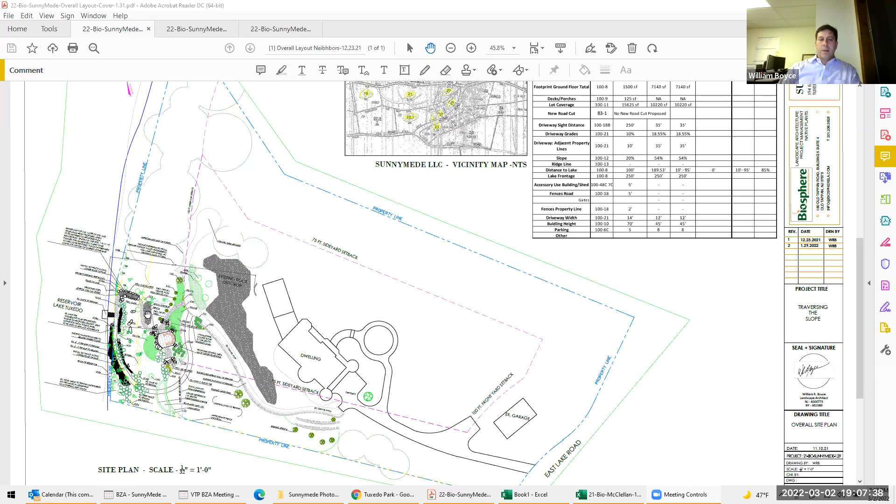I'm a landscape architect, working with the applicant. When I was first introduced to the project, the impetus was to create a place for the family to get down to the water and experience it in a way that was different from what was there. I was happy to accommodate that goal.

As you know, the site has been, recently purchased by a new owner. Prior to that, the site was denuded. I heard from neighbors and people in the community feeling as though it was strip mined. I heard that term, I heard denuded. All those pretty much apply.

Since the new owner has been there, they've worked to remedy some of those situations. However, there is still one big scar on the landscape, or maybe a few that need attending to, but one in particular is the gravel pathway that extends within the riparian buffer all the way down to their dock. That's where I'm pointing now.

The objective is to provide access to the homeowners in a way that's safer. It's a gravelly slope that doesn't feel comfortable walking on, while simultaneously restoring that riparian buffer, which is very important to the water quality within Lake Tuxedo.

There's a few strategies we'd like to use to accomplish that. One would be to remove all of that gravel and loose aggregate that's in that area and very erosive. Two would be to pull back and make the existing riprap in that area less linear so that it fits the visual mosaic of what is there, and then plant lots and lots of plants.

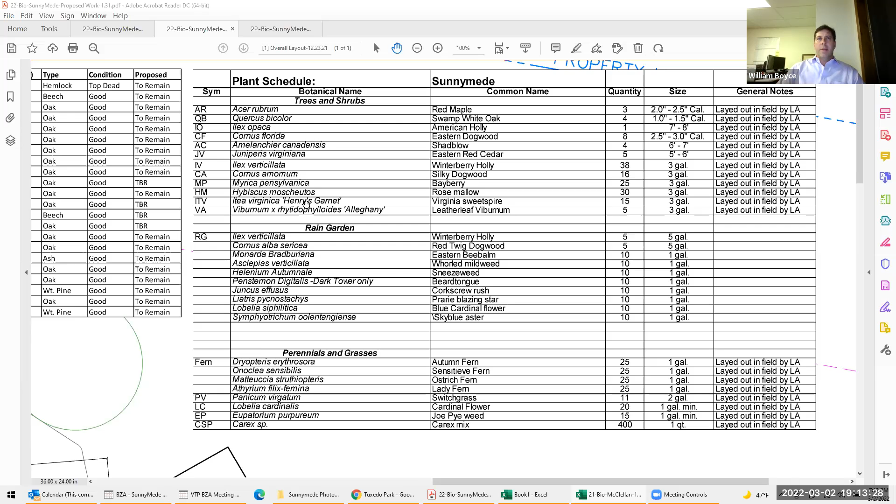And then throughout the riparian buffer, there are another 546 smaller ferns, switchgrass, cardinal flower, Joe Pye weed, and carex.

They're all native. They all will work beautifully within what's there now, woven into the existing plant material.

The moss that's there now, we would not be interrupting any of that, only adding to it in small pockets by hand, so as to increase the biodiversity within that buffer, which, as we all know, will filter the water.

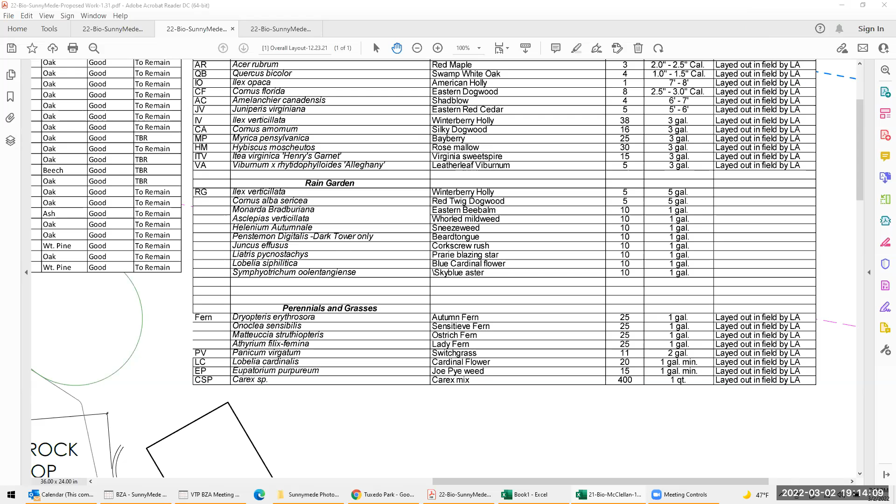It'll be kind of mixed in with the plants, not to smother any plants, but very carefully. Some can be pulled out also.

And take over all the native plants there because it's far more invasive than anything that's native.

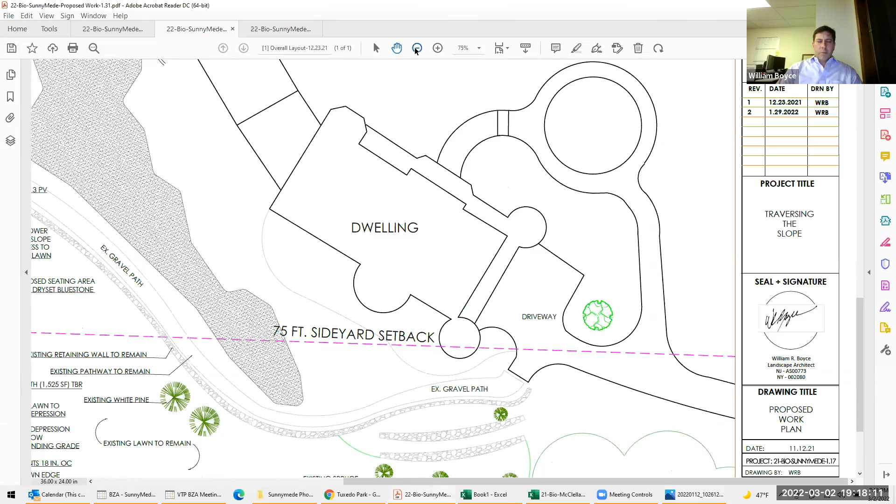Let's see, I'm going to zoom out a little bit so we can see more of the plan, and then I'll open it up to everybody.

Of course, we would be using erosion control measures to make sure that the water is protected during the course of the work, and even can retain those measures as long as necessary till we know that erosion is not going to happen. There's tree planting details and landscape restoration notes.

This is the actual plan itself. Oops, too big, I want to make it smaller.

There are far fewer trees being removed in our revised drawings than there had been in the previous submission. Now we're only looking to provide a small view out from this area of the lake so we can enjoy it.

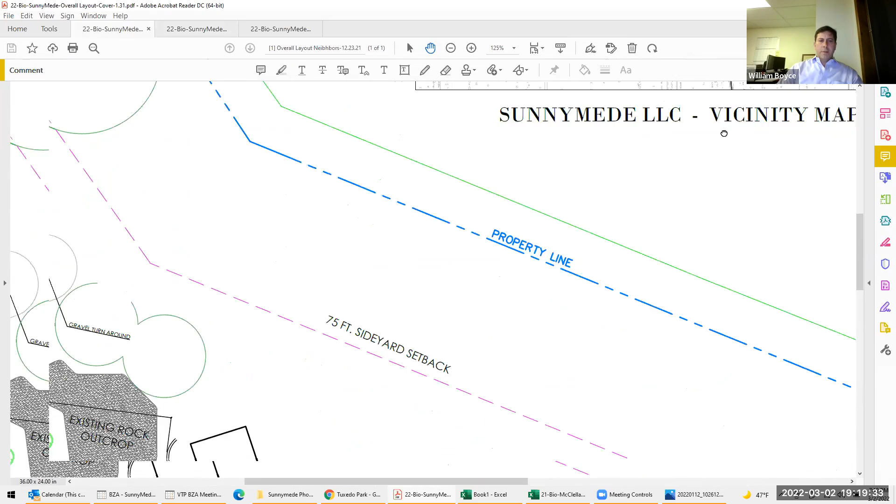Additionally, those trees that would be lost would be compensated for by 154 some odd native plants that would include oaks, because we do know how important oaks are. Your board pointed that out, and we're respectful of that. We want to definitely accommodate the needs of the board and nature. And I agree, oaks are amazing and very important. As a landscape architect, that's what I do.

That kind of concludes my initial presentation. I'm sure there will be questions, so I leave it to the board to further the conversation.

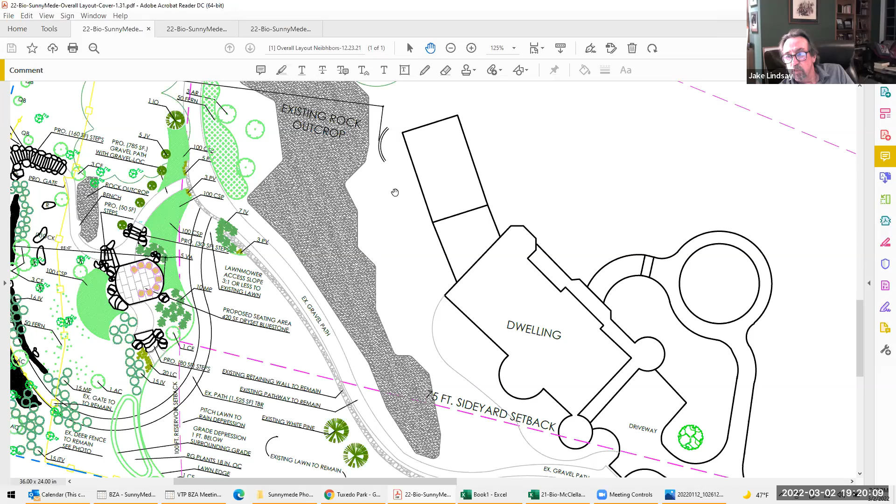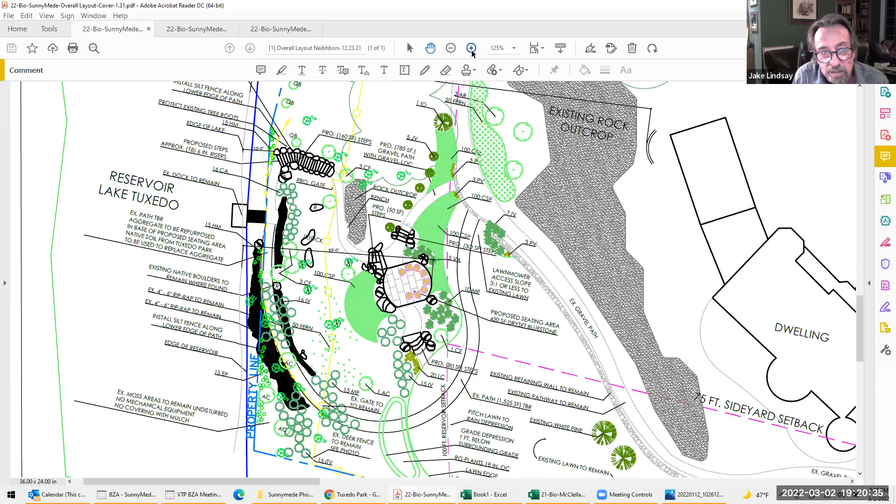William: You have the note here about the riprap to remain, which is actually very unsightly at this point, the riprap that's along the lakeside. Yeah, in testimony I just said that we would be mixing that up and kind of pulling it out. We're not opposed to pulling it out. I just don't want to do more damage to the plants that are kind of restoring themselves in and around that. I'm sure there's a pretty careful way where we can fix that, but I don't want to create an erosive condition on that steep slope.

We do have 546 perennials to plant in that area, so I'm sure that as we take out the pathway, we'd be pulling some of that riprap around, and I can re-note that. Right, because right now, quite frankly, when you look at it from the lake, it looks like a wall. Yeah, again, we don't want that. That's something that I want to fix.

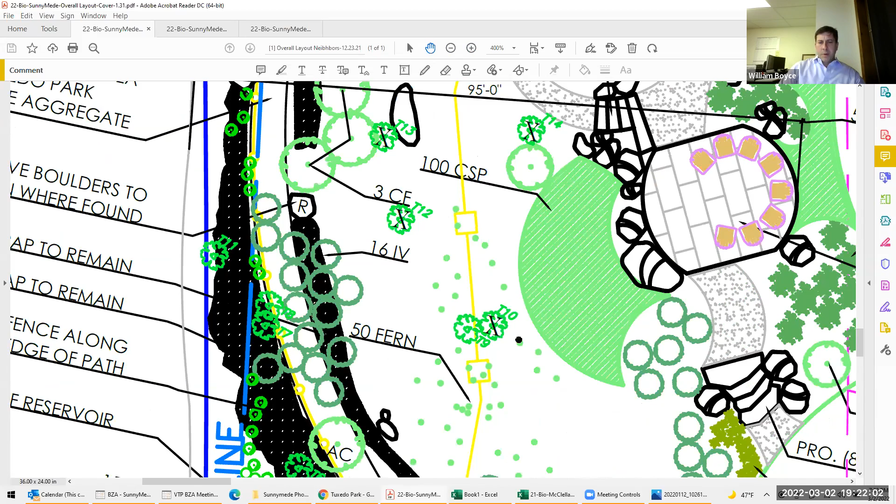I guess you should maybe just point out the trees that you are looking to remove and the size of them for everybody's benefit. I'll do that. The trees with the X's, such as this one, this one, this one, and then I'll refer to the list. Okay, there's 4, they're right here in the middle. 1, 2, 3, 4. Those are noted as T10, T12, T14, and where did the other one go? T13. So T10, 12, 13, and 14.

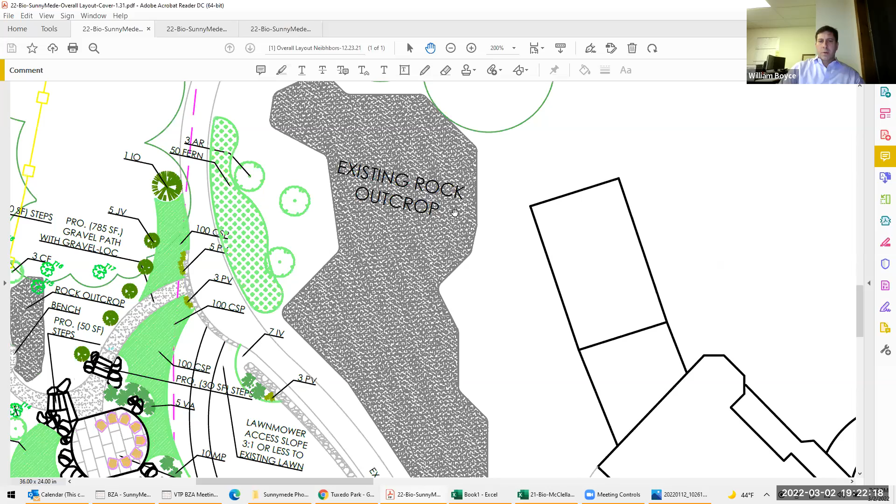And I can refer to the existing tree schedule to point those out. Can you also pull the photo that shows those trees? I will be happy to do that. I think my tree schedule is on my other plan.

T10 is a 14-inch oak. T12 is a 14-inch oak. T13 is a 13-inch beech. T14 is a 19-inch oak.

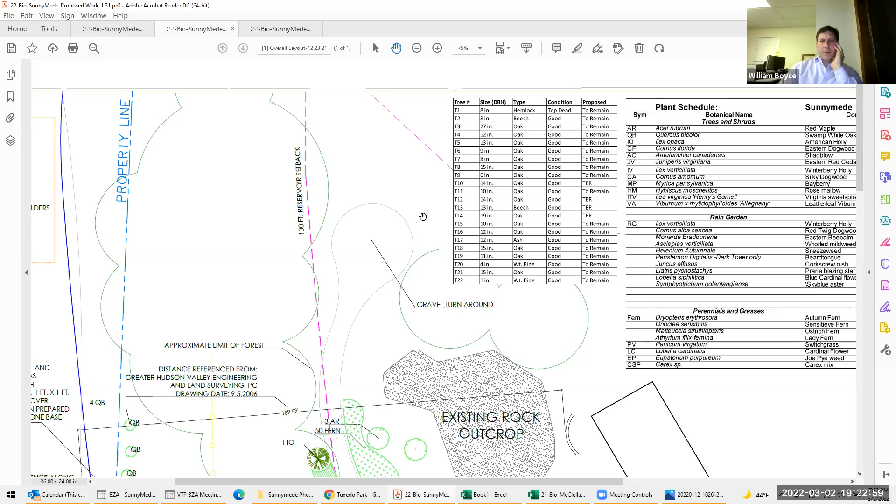Within that buffer, there are a total of 22 trees, 4 of which are removed, which I believe is within the ordinance's provision. But wanting to be good neighbors and good stewards, and also wanting a view, we were hoping to mitigate the loss of those trees by planting 150 other trees.

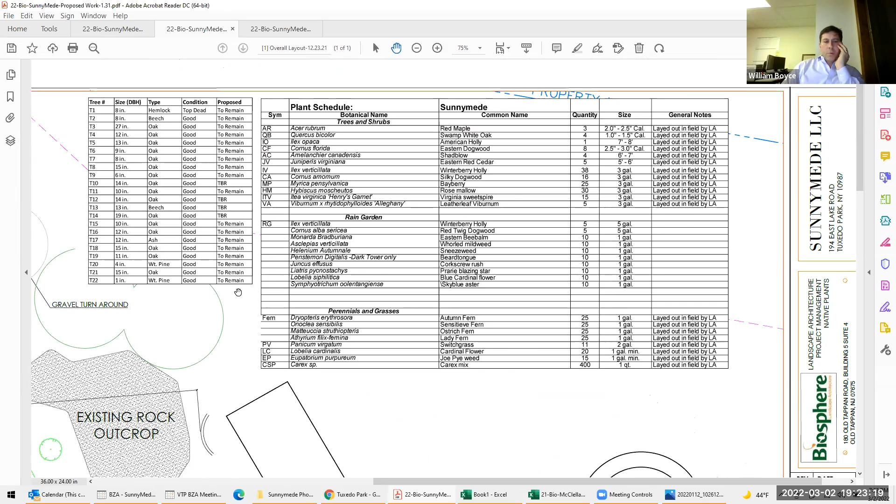So as to mitigate that and add more biodiversity, and create a lower shrub layer and an understory tree layer, and ultimately the larger climax forest layer, because right now there's few layers.

Okay, so now I can show you the photograph to illustrate that. I want to expand it. There we go, those trees are right in this area here. So remaining would be all the trees along here, and then all of these trees here. So it's really these 4 right here. And then again, there would be an understory shrub and tree layer complementing the balance of the site.

The other question I have is the existing path that comes down from the home, what you call your existing gravel path, and a lot of that falls outside of the 100-foot setback. I guess that's part of it that's in there right now, correct?

Yeah, this path falls entirely outside of the setback. In fact, if you can see where my cursor is, right around here, this is all disturbed land, which my plan doesn't really capture accurately. That's exactly what my question was going to be. Quite frankly, I think if we're looking to restore, that area would need to be addressed also.

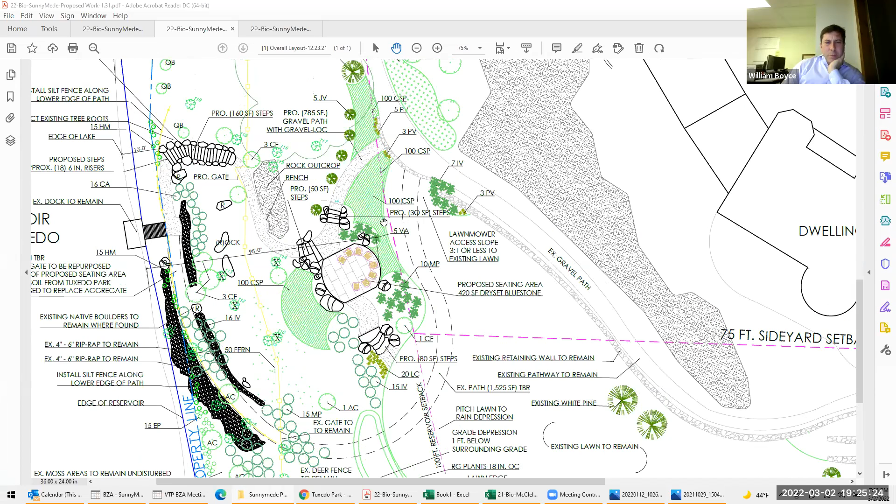So our intention with that area is to come down the gravel path, which we're looking to secure, and that's outside of the buffer. The buffer is this magenta line. Eliminate this cinder path that goes out of the buffer and then in the buffer, add a lawn within this space here.

And then that lawn would be non-erosive. And then these are carex pennsylvanica, and this is all native, low-growing plants. They're like small grasses that are semi-evergreen, they would be through there. And then Juniperus virginiana, which are native juniper, the tree form of a juniper, and they attract wildlife and are just great for the environment all around.

So yes, we would be restoring that area that's in the photograph, and then the area also that would be outside of the 100-foot, too, where you have the note lawnmower access slope, 3 to 1 or less.

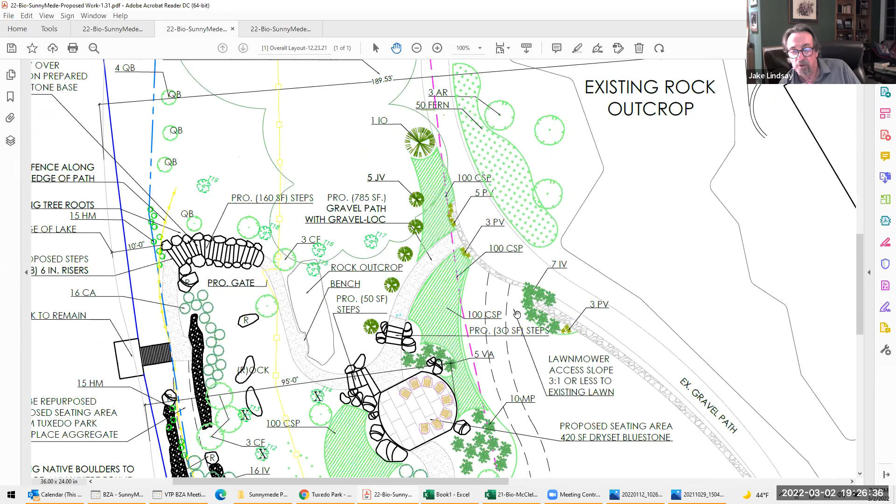That area where that note is, is also a very visually bad area. Yes, I think this picture kind of hints at that. We have our friend the Japanese knotweed here, so that needs to be removed.

This rock would stay, but really from this rock wrapping all the way around, all of that would be improved, planted. It would either be lawn or plants. I have plants along the edge. All of these plants are myrica bayberry. They're phenomenal, I love them.

These are Ilex verticillata, called winterberry, so they'll have red berries in the winter which the robins will be looking for. And this is just Panicum virgatum, a switchgrass right here on the end, and that'll all soften the terminus of this wall. And then between the wall and the carex, it'll all be grass.

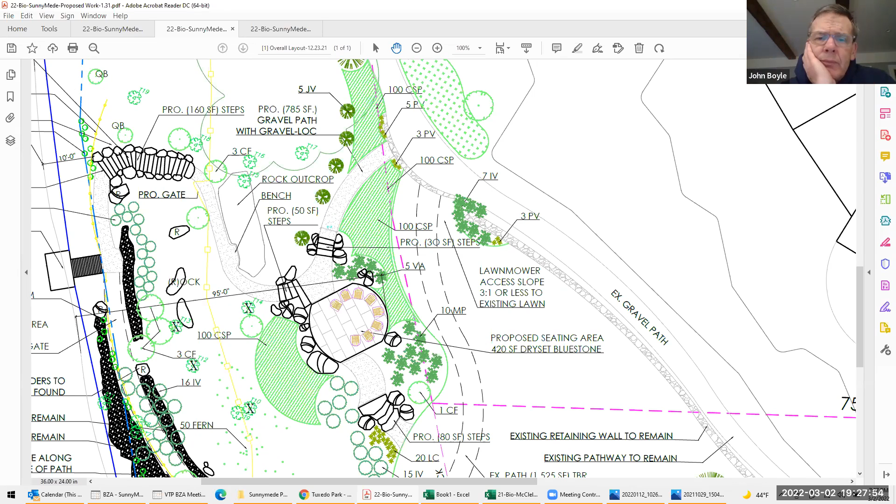I guess the question I have is where you currently have it says lawnmower access slope, is that all currently just a rock outcropping now, or is there an ability to add vegetation there as well? Yeah, there's just one big rock there, right here.

I'm thinking the area actually to the right of that, above the path, right in this area? Keep going to your right. This area in here, right? It's all kind of barren and looks like a strip mine. Yeah, actually, I have addressed that to some extent, I'll show you where I have 50 ferns going in there, kind of in and around.

Below that, you see where it says lawnmower access? Right here, keep going down. Yeah, that area in there, is that all rock, or is there an ability to add vegetation in there as well? Yes, sorry, I just had a visitor. Yes, whatever is not lawn would be plants, and yeah, that whole area is intended to be restored.

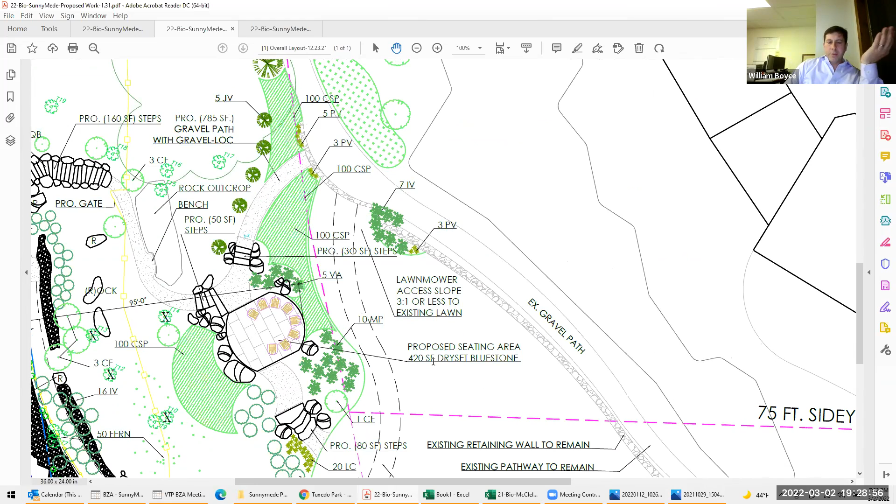Okay, well, that should be shown on the drawing then also. Yeah, that's not a problem, that's existing lawn to remain. I can just put a note: existing terrible lawn to be improved, or something of that nature.

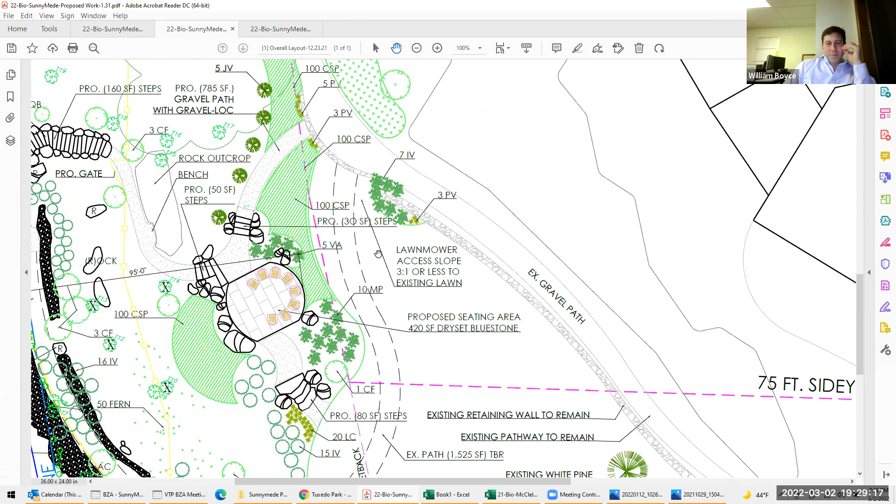Before we give it to the public, this should have had a topo to go along with it. Do you have the topo? Because you're pretty steep access here, and when you look at it, it's hard to tell whether some of the steps are going up or down, or what the grades are, or what percentage of slope in those particular areas.

I agree, I would have loved to have had the benefit of a topo on it. I've been performing work as a design build firm for 25 years, and in my experience oftentimes we don't have a topo. But all of these risers are 6 inches, and I can pull a string level from here and do it based on spot elevations. I really just want to weave it into the existing slope, and I know that's not going to be a problem for us.

I went and took spot elevations at the bottom of this riser and approximated the location of the top. I know horizontally I can make those 6-inch risers work to get up there. Then this is pretty flat all the way around. Then these are 4 more risers up, and this will all be flat. We use rocks that are on site. This is an existing flat area, pretty flat, and then there's a few more steps up here to get us up to here.

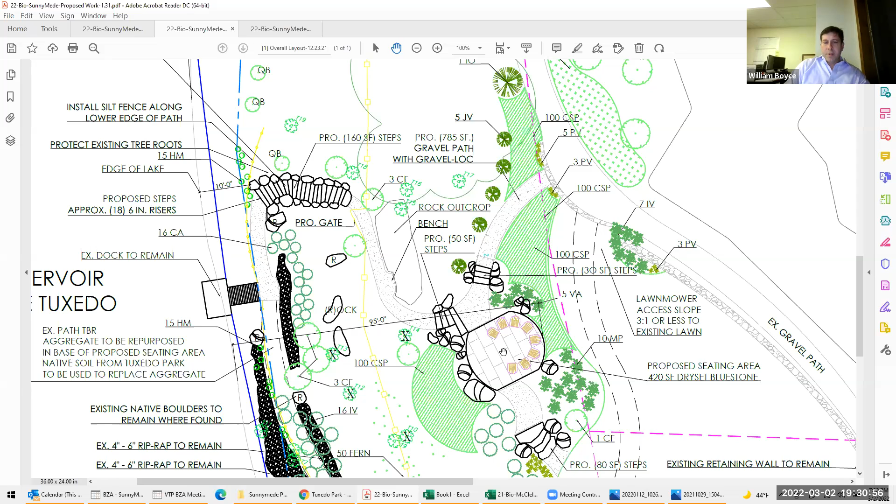I understand completely, we're kind of novices sometimes, so we really need to see where the slopes are. I understand.

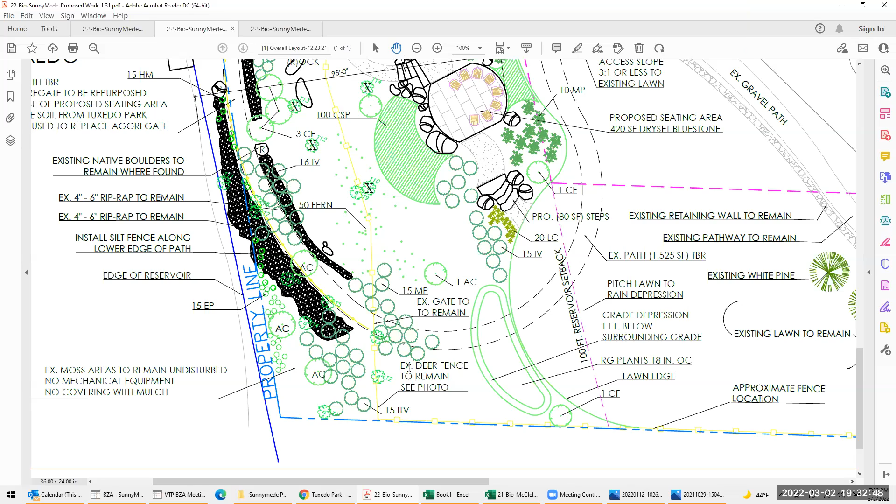That kind of gives you a sense of the elevation, I think. Can you blow it up, John? What section do you want to look at? Well, just have it be the whole screen. Even if you just get the whole screen, right now you've got the half. You've got your downloads on it. Is that what you see? Okay, yeah, I see half a picture and then the downloads.

Hold on a second, let me see if I can open it first. Bear with me. Nice sweatshirt, John. Well, we coordinate, we'll have to call each other again to get a different sweatshirt next time.

That better? Yeah, you got it. Much better, there you go.

So maybe, William, you can just kind of point out where the patio is going and where that barrier is. I wish I had that ability. How do we do this? Well, because John shared, John's going to have to do it, I guess. He's got control of it, right? William, you can see my cursor? I can, yeah, okay, all right.

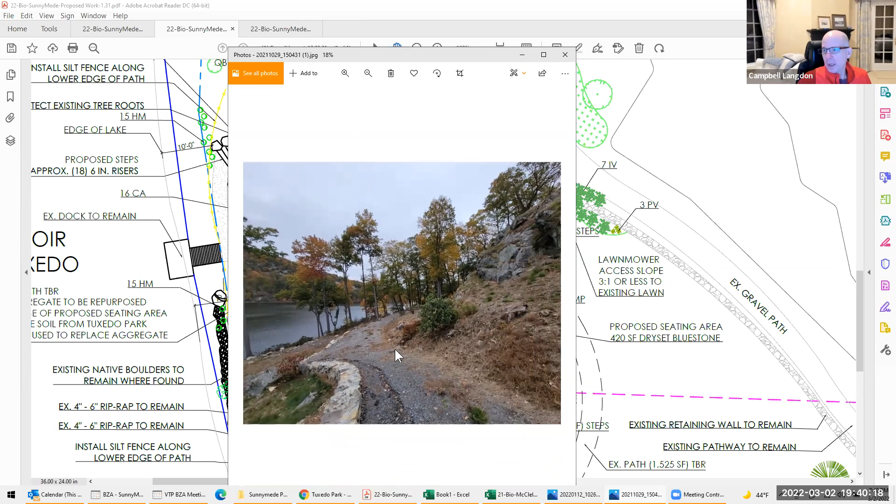Would the patio have to be graded to make it flat enough, or would you have to have a little grading in there for the patio? We'd have to do a little grading. We'd use a little bit of cut and fill, balance the cut and the fill. We're not importing anything, but we would cut into this area and push this way, and then use some of the rocks around this area. We're not proposing any fancy additional walls. It's really intended to be naturalistic.

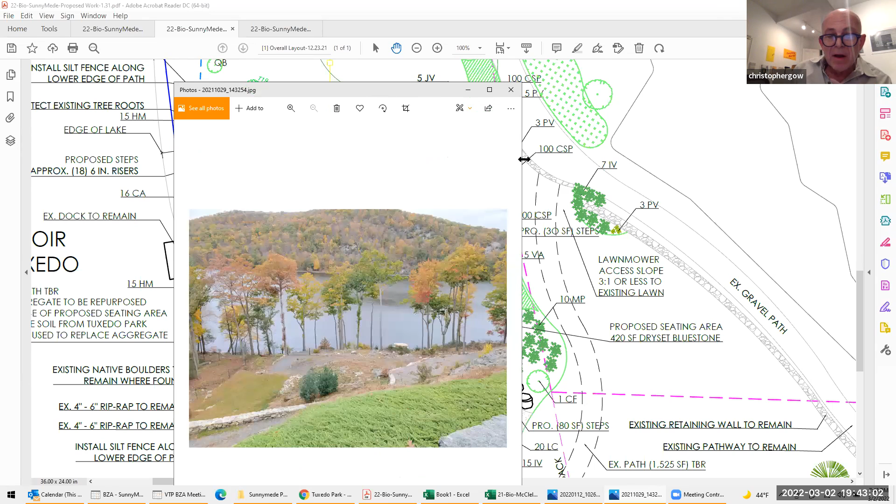From an aesthetic point of view, if we're not looking from the McLennan side, if we're sitting enjoying the patio, if we're looking at the McLennans from the lake - here's an analogy. It would be, I don't know, as if you're going to a ball and you've got your beautiful diamonds, your earrings and necklace and all your family jewels, and you forgot to put your tiara on, you've thrown the tiara out. That beautiful canopy of trees above you would be missing.

So there is this sort of platform, like the top of an Aztec ziggurat, where you'll be sitting completely exposed to all of us on the lake, yourself completely exposed to the sun, because you won't be sitting there when it's not sunny, and those trees will be providing you a lovely shade. Otherwise it's going to get very hot there. So I really, really would implore that you keep those trees, especially the 19-inch oak tree, the T14 tree, which is quite near the patio, and that would be the one that would provide you with some shade.

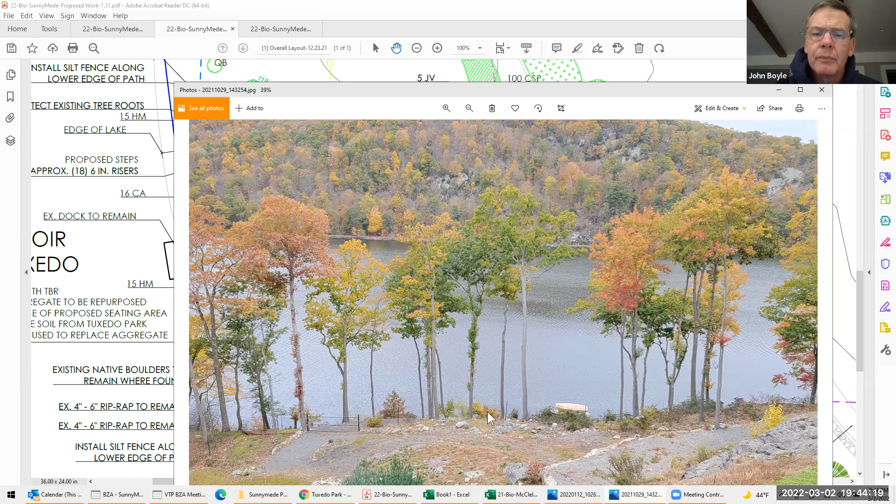Could you point out to me again which 4 trees we're talking about, William, please? On the plan view or this photo? Right, we're looking at right now. Yeah, these 4 here. Okay.

So if we analyze these 4 trees, and Christopher, thank you for that, I do appreciate it, and I do appreciate trees as well, as we all know. These 4 in particular, this one's displaying suckering branching, as Mr. Gow indicated, they have been stripped of their lower branches.

Of course, the loss of any tree is not necessarily the greatest thing, but I know the applicant has made it clear that they really, really like the water, and they are restoring the whole ground plane with copious other plants, all native, really looking to create more of a layered effect and feel as though that would be compensation. I think that the shade they would be benefiting from those trees might hit at a certain time of day, but I think most of the day, given the elevated canopy, it's not going to be as wonderful as we would love.

I know that the last time we presented, there were 10 or 11 trees to be removed, but after really analyzing what the owner wants, they really want an uninterrupted view of the lake from that one spot. So we worked with them to refine the expectation, and it's hard to keep those trees in that spot because they want to see more water in a contiguous view. That's the position I'm in.

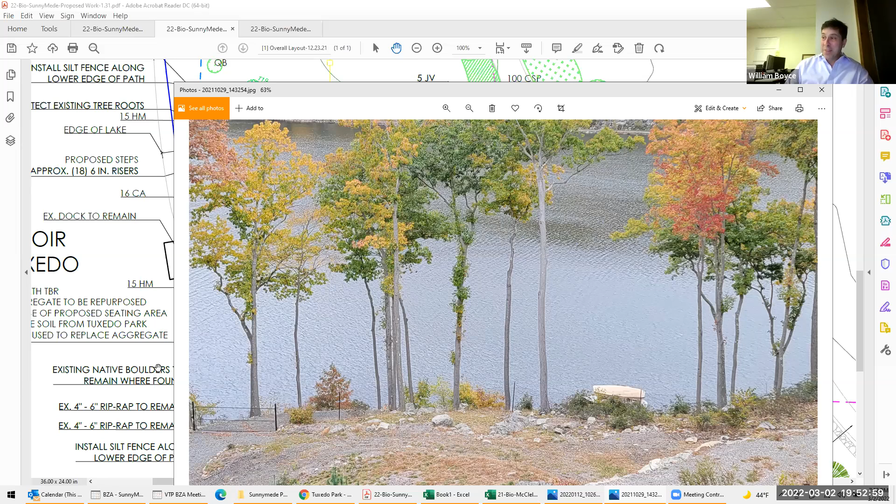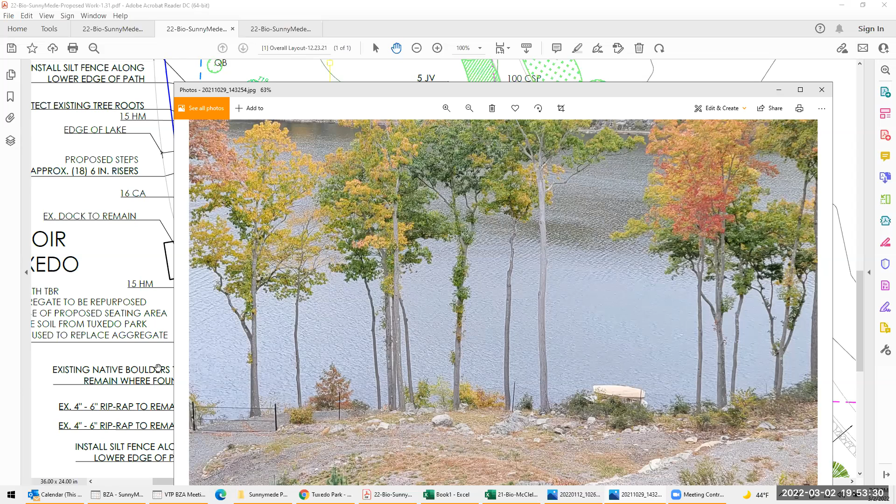John, you've mentioned previous meetings about doing something at grade. Doesn't need the same type of variance, is that correct? Yes, this is construction activity in my interpretation, within 100 feet of the reservoir. There's also terrain alteration, and it would require a variance within 100 feet of the lake. I do understand the code may be vague in certain points, but I think the code's main prerogative really is to protect the environment and protect the neighbors from activity.

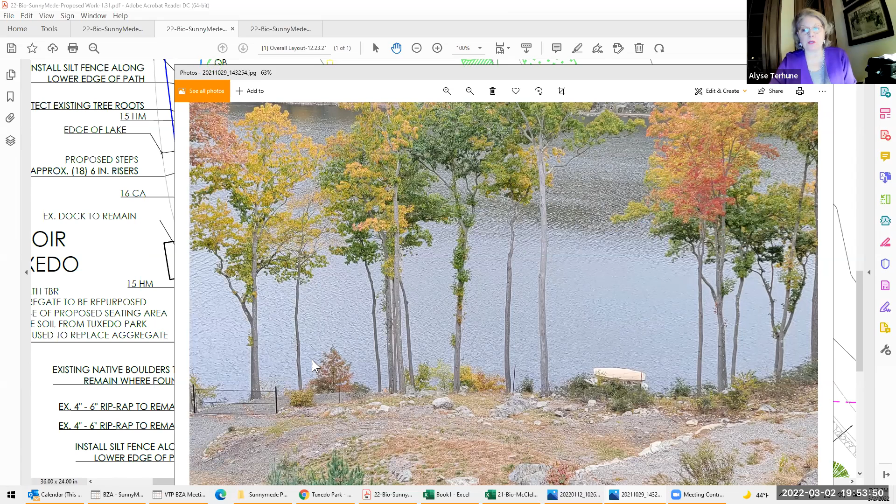Mr. Chairman, may I ask a question? How far from the lake is the patio? What's the closest point of the patio? Well, they don't show that, but obviously the steps would be the closest construction, and that's showing at 10 feet. I would suggest they add a measurement from where they want to put the patio as well. Right, they show 10 feet for the start of the steps and the stones around the steps, and they probably should show what the patio is also.

Yeah, that's a fairly flat area. It's not natural, so I would think the zoning board would want to consider where it actually is. Well, that's one of the reasons I think we really do need a topo before we finalize things. If you look at the existing property right now, it's just a flat area that has nothing on it. It's eroding, it looks like garbage. And all they're doing is putting stone on top of it. You may consider that construction, but it's just papering over an existing flat area. In fact, it'll be less erosive having this patio than it would where it exists now.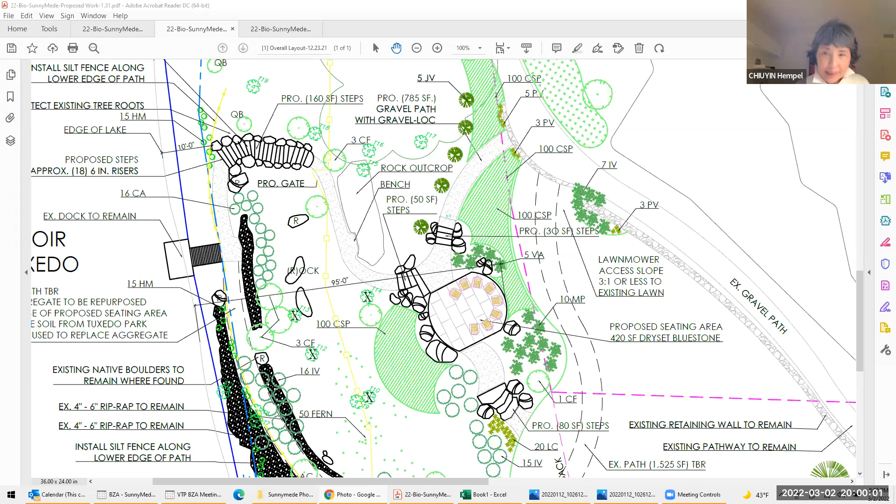So think about the precedent you are setting, the example you are setting, by allowing construction within 100 feet of the reservoir. To this last point, I'd like to make a distinction between landscaping and construction. I'm delighted that Mr. Boyce and the owner are thinking of planting all those wonderful trees and shrubs, and taking remedial measures about that badly constructed path.

But the patio is an artificial construct. That to me is construction. In the absence of definitive statements in Tuxedo Park's law about building within 100 feet of a reservoir, I would hope that the BZA can actually look very closely at that particular part of the proposal, the patio, because that is construction, that is a structure, that creates more impermeable surface.

Even though I think in the BAR presentation Mr. Boyce said he's going to make it as pervious as possible, and there will be a rain garden and so on, I'd like to suggest thinking of the precedent. Mr. Boyce and Sunnymede's owner are environmentally sensitive, but we can't guarantee that everyone else following will be. That's all I have to say. Thank you.

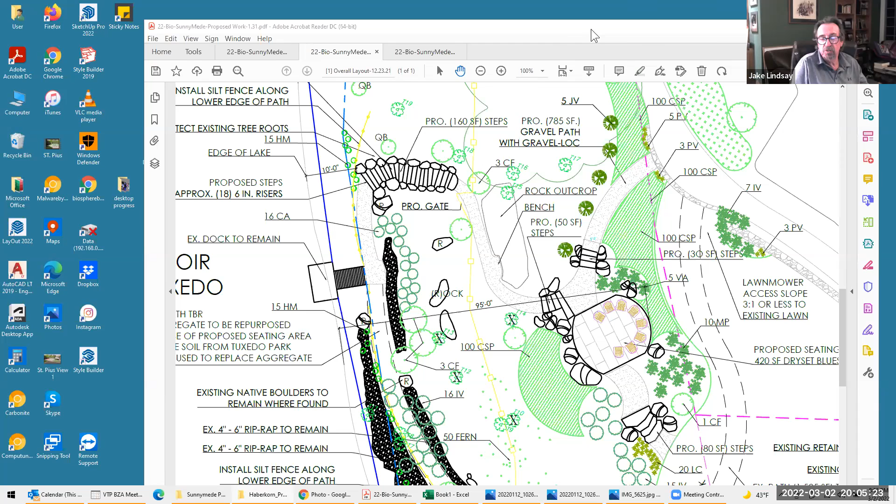There's one neighbor that did it allegedly illegally. The one you just showed is 224 East Lake Road, which was approved within the last 2 years. The Bruners were also approved recently, but that was a lot smaller of a project. You can't even compare the two.

It's a lot larger of a project with way more stairs, a much larger patio, and the same thing for the Haberkorns. The Haberkorns' project was an existing stair that they actually cut back.

So it feels a little bit punitive, where we've tried to do our best. We agreed to take out the 4 trees we're already allowed to take out. We don't need permission for that, we can take those out. We're trying to be as environmentally sensitive as possible and make the area way more beautiful than it was, because apparently everybody hates it.

I would certainly agree with you, we want something done there. No question about it. But I'm not going to pay thousands and thousands of dollars to landscape a dust bowl for everybody else's pleasure if I cannot easily access my dock and enjoy it.

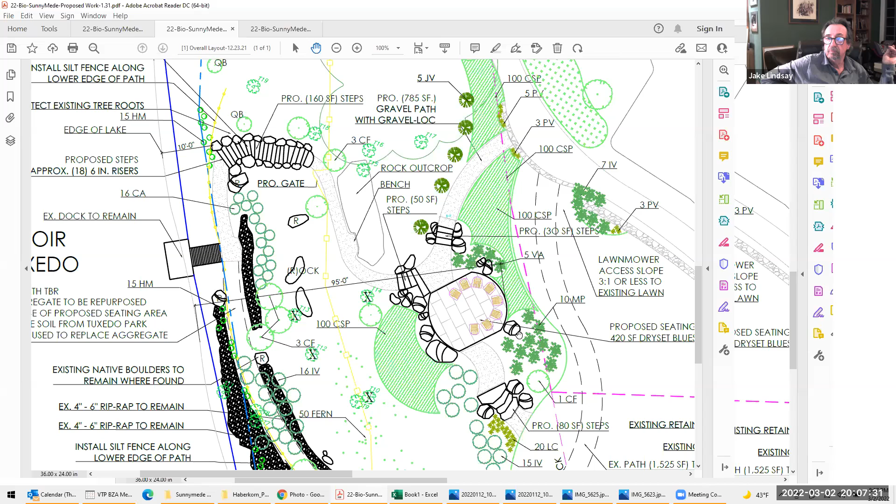Are there any other public comments at this point? I assume not. Elise, are you still here, Elise? Okay, you weren't coming up on the screen.

Yeah, I'm here. Mr. Chairman, if you are going to ask for additional materials from the applicant, you may wish to keep the public hearing open. Do you want to speak? I'd like to make a comment.

I appreciate all the environmental concerns, but I do have to agree with the applicant that this is a major improvement to the area. I don't feel that a 420 square foot patio, constructed the way it is, is going to alter the ecology of the lake or be an impactful structure. I think this plan is much better than the previous one, and they put a lot of effort into it.

Yeah, I would also agree with that. Even with the patio, it's likely to be more environmentally sound than the existing condition today. So it's not just an improvement from a visual perspective, it's an environmental improvement as submitted versus the existing condition.

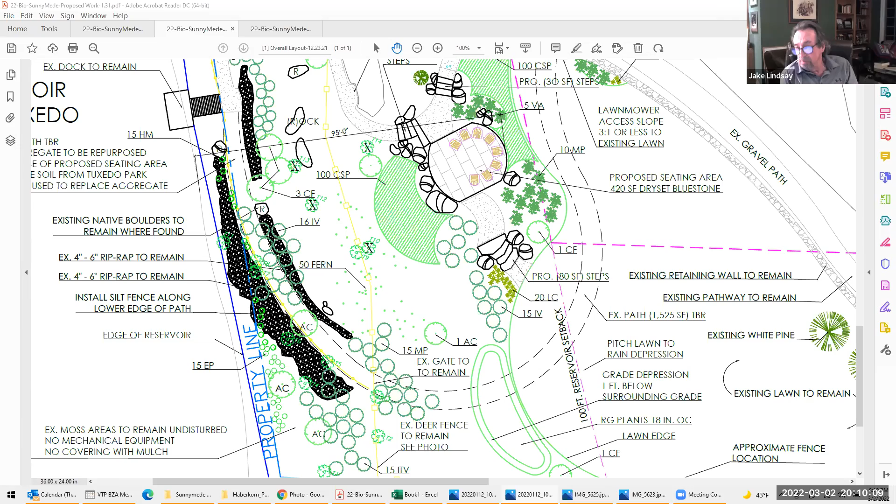So since they are asking for approval, we're taking into context the entirety of the plan. Elise, I would assume that in this particular instance we would look at the whole project, correct? Yes, you are deciding whether or not to allow construction of any kind within the 100-foot buffer, so yes, you're looking at the whole project.

I think their patio is just covering an existing flat area. I appreciate the concern around trees and everything else, but I think they are doing a lot to mitigate those concerns with existing or new plantings. I believe this covers a lot of the questions I had, not only on the setback but also the overall beauty of the project and its positive impact on what is a strip mine looking thing right now.

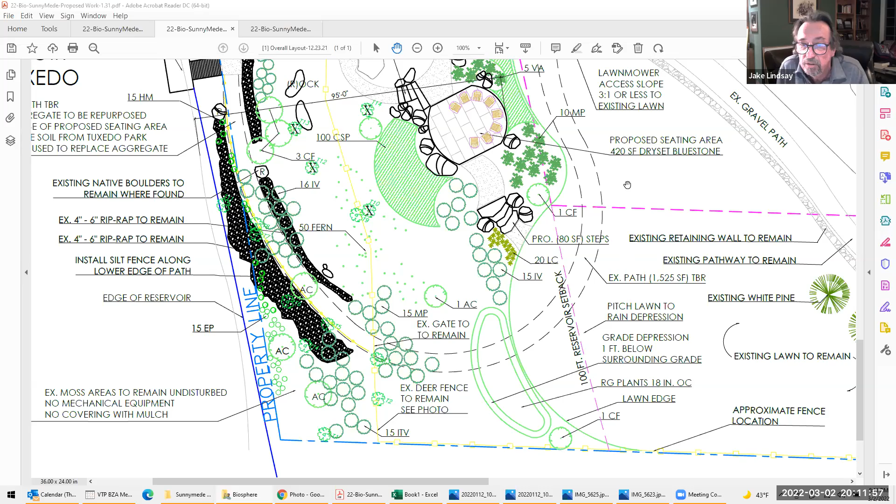I certainly agree that it's an improvement and it's moving in the right direction. I, number one, really think that a topo is really required for us to approve something like this. And I would also like to see more ground cover plantings in some of the areas that we pointed out, where you talk about existing lawn.

Up where the path is, and then to the right of that, where right now is the start of your path, off of your existing gravel path — no, the one that you're removing — there should be similar plantings in that area up to that wall.

Where the existing gravel path is, I would like to see a topo, and I would like you to consider saving some of those trees, because you're going to need a big piece of equipment to go down and cut that tree down. And then also you're going to need to take out the roots, I assume, unless you're going to stump grind it.

Actually, if we did take out the trees, I would leave the roots because they'll hold the slope together. So you would stump grind it then? Yeah, it wouldn't be an eyesore from the reservoir at all. At most it would be stump ground, or we'd dig around it and flush cut, sacrifice a few chainsaw blades. Well, stump grinding would be easier, and that's actually less disruptive.

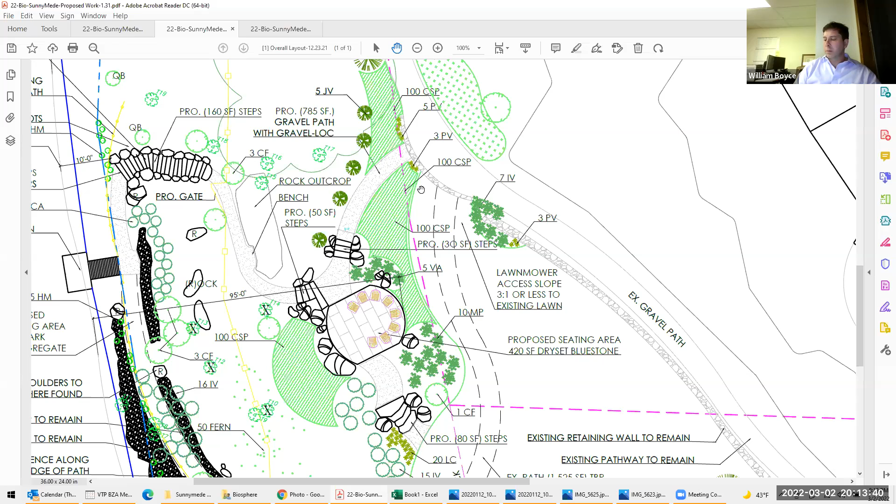Okay. Yeah, I would prefer to leave the roots in place and stump grind, as you're suggesting. I may just make a comment — with this project, the least disturbance possible. It's already a compromised site, so the least disturbance possible. Removing roots and that sort of thing is just a terrible thing.

There is another option as well. A dead tree is called a snag, and some dead trees are more useful than live trees as far as wildlife is concerned. So for the McLennans to enjoy this garden, the more trees there are, the more birds there will be, and the more songbirds there'll be. That'll be wonderful to hear as well, as far as the acoustics and aesthetics are concerned.

The other point I wanted to make was, yes, to make an exception for building within this 100 feet, something significant has to give in order to make this an exception. Yes, a small patio isn't going to make much difference — it's the principle that's being made here, that we're changing the rule for something. So I appreciate the McLennans and Mr. Boyce putting together this environmentally sound plan.

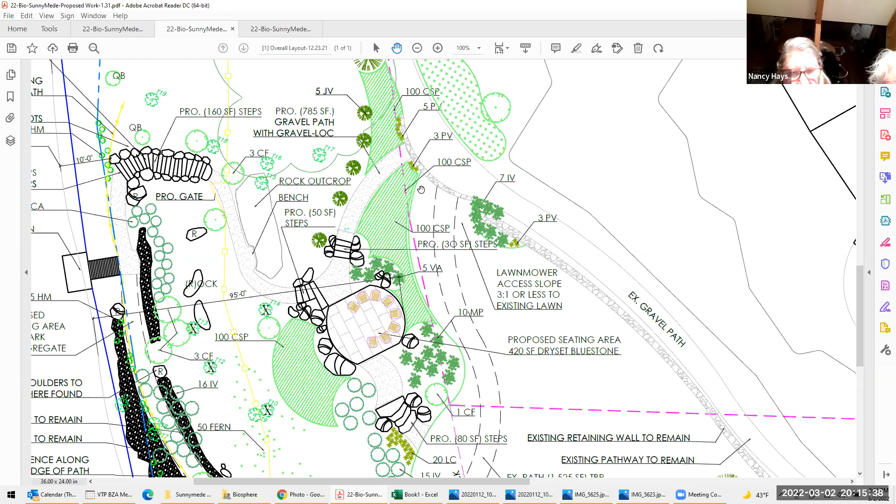Because that is the most fundamental thing — the aesthetics is important, but the environmental aspect is the huge deal here, because we don't want a chain link fence put around our reservoir, because too many projects like this have happened by the lakeside, and the DEC sees that we're compromising our drinking water. So it's great that the McLennans are making environmental leaps in the right direction, so there has to be a net gain, and a good example to make up for all the other neighbors that got away with it in the past and made our lake look like Greenwood Lake instead of Tuxedo Park.

With the boulders and the steps, this is going to look more aesthetically like an Adirondack Lake as opposed to Greenwood Lake, and I think we all agree that's why we're here. So the least suburban it looks, the least messed around with, the better. That's all I wanted to say. Thank you.

I personally would like to see more information and more on the drawings before I'd be in a position to vote on it. I think a topo would be required — additional. There's an old topography report that was done on the property, which is what we used when we submitted for the pool. Okay, but we don't have that in front of us.

Well, when we submitted — it should be, it wasn't requested. It just seems like a lot of stuff comes up. But I'm requesting it, for us to really review this, and I think the topo should be required — like every other one I've heard about a month ago when we turned this in. I'm going to look for the topo, and he's going to pull it up. And I don't know how these steps would be worse than somebody putting in a brand new boathouse on the lake.

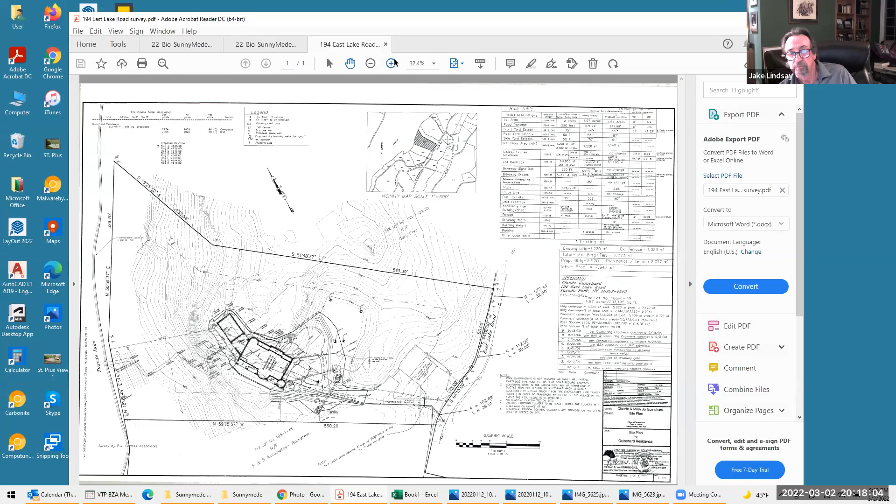Well, a boathouse on the lake, you're bringing in things that the boathouse carried over from an old code. People who had a boathouse on their property at a certain point in time are allowed to build a boathouse. It's part of the old code. Thank you, Bill, for pulling this up. As of 2008, right?

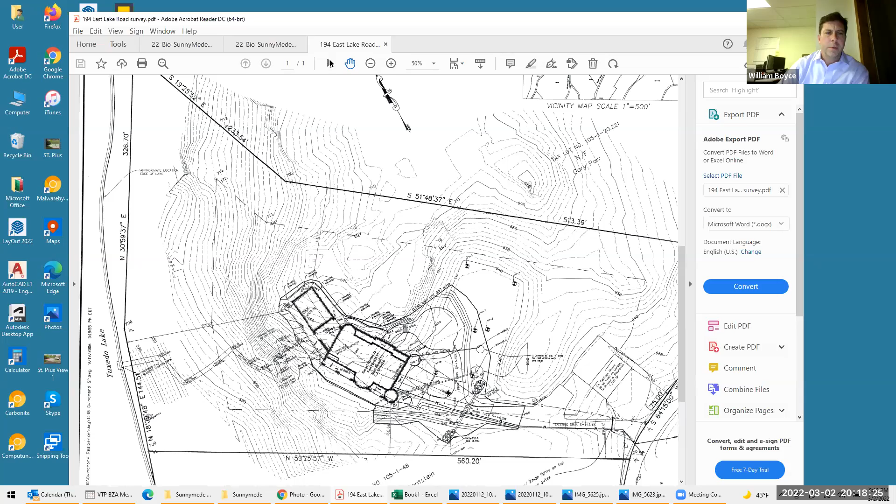Did somebody see that? This was revised in 2006, I see, but the water elevation probably is the same. Rock outcrops are the same. This is the extent of the topo that we have.

Just trying to pan down to... I don't think my computer's happy with me. Okay, that's better. Cliff, that's a cliff. It's steep, the whole thing is steep. So wherever the contours are close together, it's very steep, as somebody pointed out. So this is really steep. This is where the cliff is up by the house.

Since the inception of this plan, there was a road that was put through here, and I would say the dock is static, that hasn't moved. Has the dock moved? Anyone? No, it has not. Right.

No, but honestly, typically you get the landscape plan should have the topo on that plan, which shows the location of the patio, shows the location of the stairs, shows where they're coming out. This is somewhat, honestly, most of the time we're getting drawings, especially something that needs to be looked at closely. You should have a topo.

Understood. I mean, Bill, you're aware of that. I'm sure you're aware of that. Stairs, yeah, I wasn't furnished that information within the area that we were working, so thinking that we would be maintaining the existing topography the way it is, with the exception of exactly where we're putting the steps and the patio, which is on the flat area.

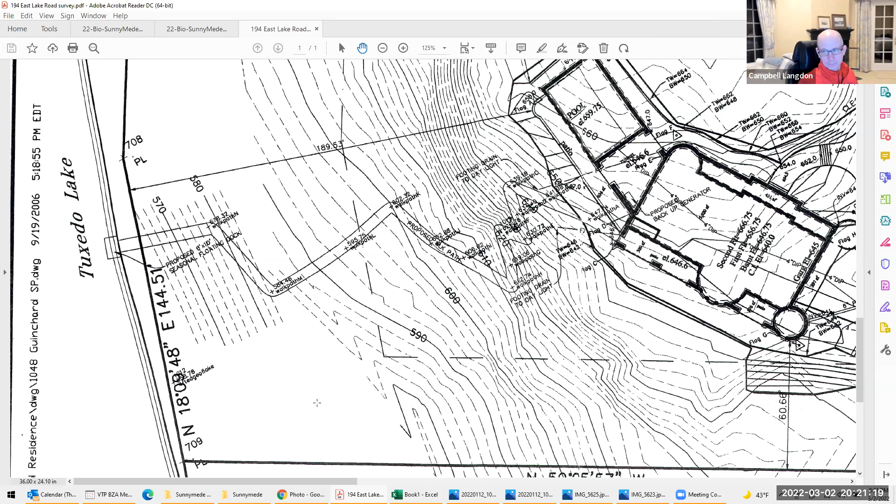So in my view, I don't see it as needed. I could do a center line by myself, just indicating the bottom of the riser and the top of the riser. I could do spot elevations all the way through the pathway and reference adjacent trees, which obviously are staying and would be static, except for the four that are in question. And that way, you could be assured that the proposed steps are respectful of the base of the existing trees to remain.

That would not be a heavy lift, and I could assure that in a note on the plan, where they're planting, and what they're planting. So you could give kind of spot elevations. Yeah, I could give top of riser, bottom of riser at the bottom of the big steps, top of riser at the top of the big steps, and then just do stationing along the pathway to help the board feel more comfortable. It's not a heavy lift and it's not time consuming.

I could, if the board were to, and I'm not suggesting this necessarily, grant approval for this conceptually, with the condition that I provide the spot elevations. No, the board cannot do that. I apologize for making an assumption. That's okay, it was worth a shot anyhow, right? All right, thank you. The board can only approve what is exactly in front of it.

So, Jake, does it make sense to have the discussion of the six points now, just to see if anything else comes up? Not ready to vote. Well, we're not voting, we're discussing the points. We were on, other than this topography request, I would say the topography request and additional planting shown in the other areas, from my perspective, okay? Now, I'm not sure what other board members feel at this point in time. I'm just trying to find my drawing.

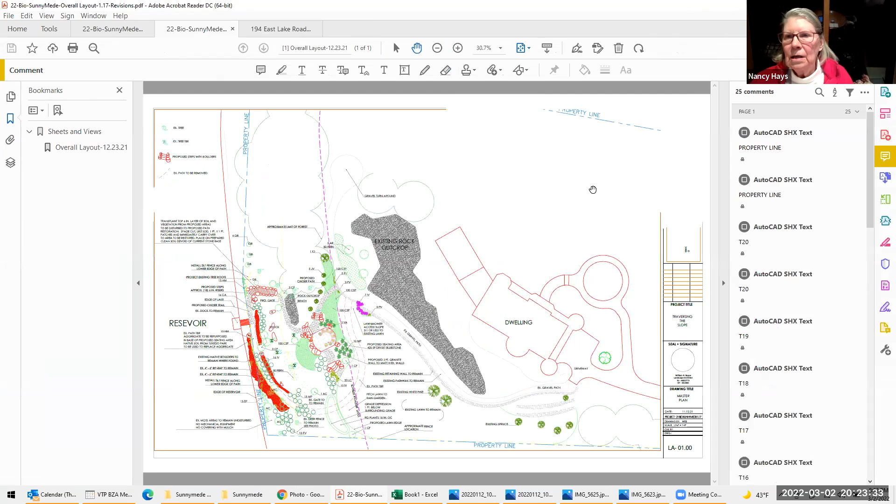I would like to see the topo regarding the stairs, if I can. I was there, I walked it. I'm comfortable with it because I actually saw it, was there, as opposed to seeing something laid out, you know. I'm comfortable. Yeah, I have to agree, I'm comfortable too. Yeah, I was also at the site today, so I saw it and believe this would be 100% better than the existing site.

Well, yes, anything would.

So it sounds like we have 3 members that are supportive. And I would like to see more information. I would like to see the additional plantings and at least spot topography.

I'm pretty quick with AutoCAD. If you could recess for a bathroom break, I can put more plants up there. I'll do it right in front of you. I would just make a point of order here that it is the chairman who calls for the vote.

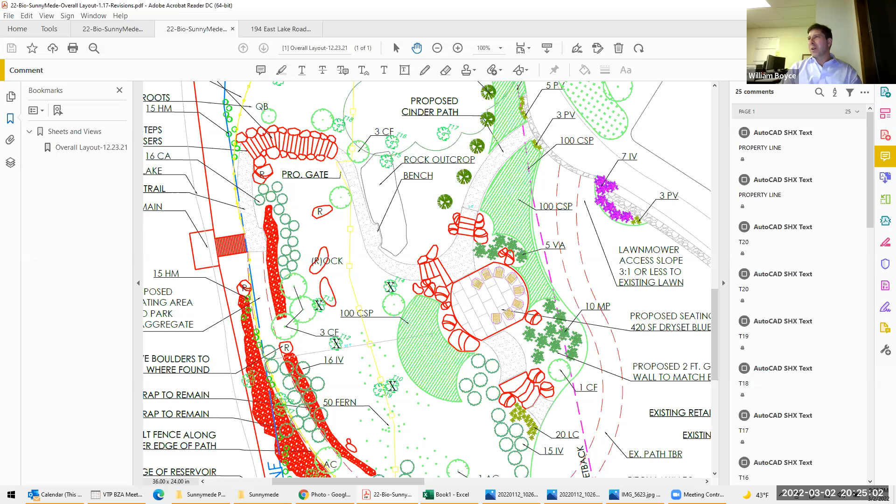Right. Can you put the additional plantings on? Yes sir, how quick could you do that? I just have to get the right drawing open. If that's okay with the applicant.

Yeah, it's fine. Would you like a sidebar, applicant? I'd whisper to you, but I'm not sure how to do that in this forum. Is it okay if I text you quickly? Yeah, I think you can just chat, or you could just put it on mute and call her.

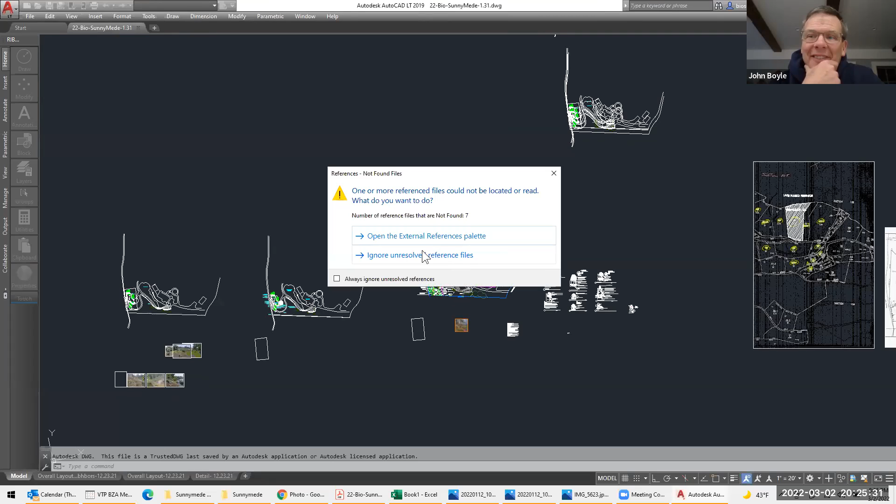Yeah, I mean, look, I'm happy to have additional plants. The whole point is planting down there. My understanding was this meeting was really about the dry laid terrace and the dry laid natural stone. We just need to look at that because it's something being built in this 100-foot setback, so we need to see the whole concept involved.

And it's all part of it, obviously. If the fact is that you weren't improving a bad condition, we would probably look at it a little differently. But since we all are tired of looking at it, we can be more agreeable. Yeah.

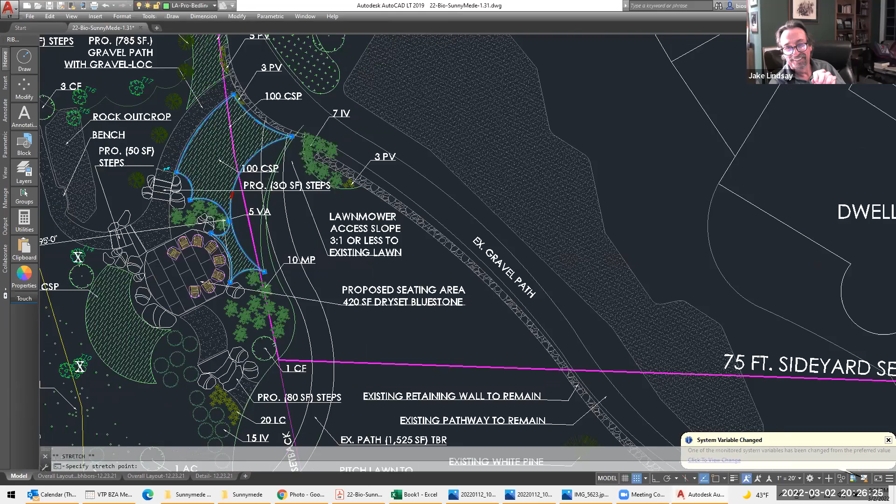Plans. All right, so that's a polyline. I'll change this 100 to 200. I'll raise your 100, make it 200 of these Carex. And then go to the area where it says lawnmower access slope, existing lawn.

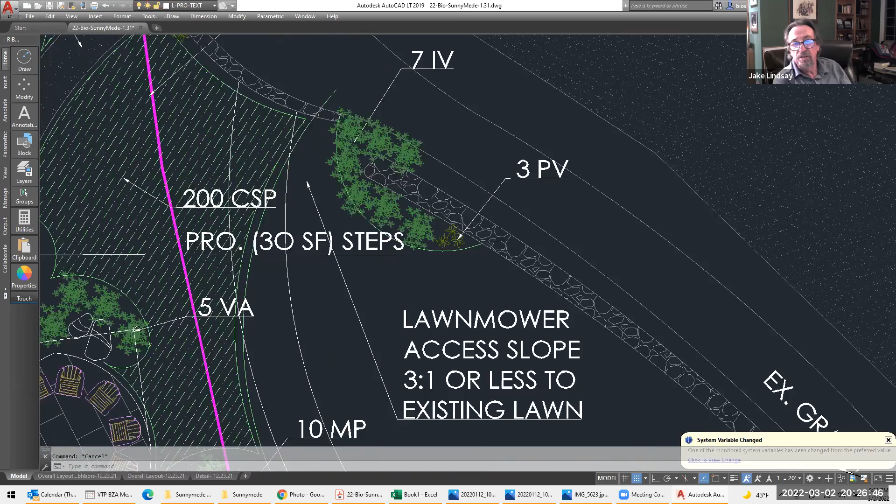Would like if we could go with more ground cover in that area, it would be great. Just want to be able to get the lawnmower in that area, but I could bring that bed over to there. And then I could do this and offset 1 foot, bring that around. While you're doing that, I'm going to step away for 1 second. Understood.

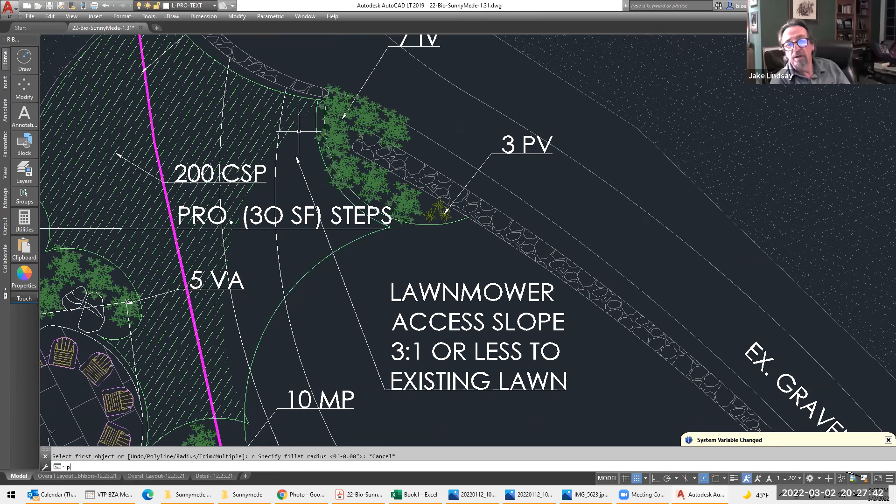Oh, you are muted. It says raise hand. Now, while you're doing that, there's one thing that kind of kicked up about DEC approval.

Now I think that, and Alyse, correct me if I'm wrong, that's not for us. We would need to give this project approval before they could go to DEC to see whether they could get a permit, correct? Well, what would happen is the BAR obviously can't move forward until the zoning board makes a decision. If you grant variance, then they go to the BAR. The BAR's decision would be conditioned on any permits that they might need from the DEC.

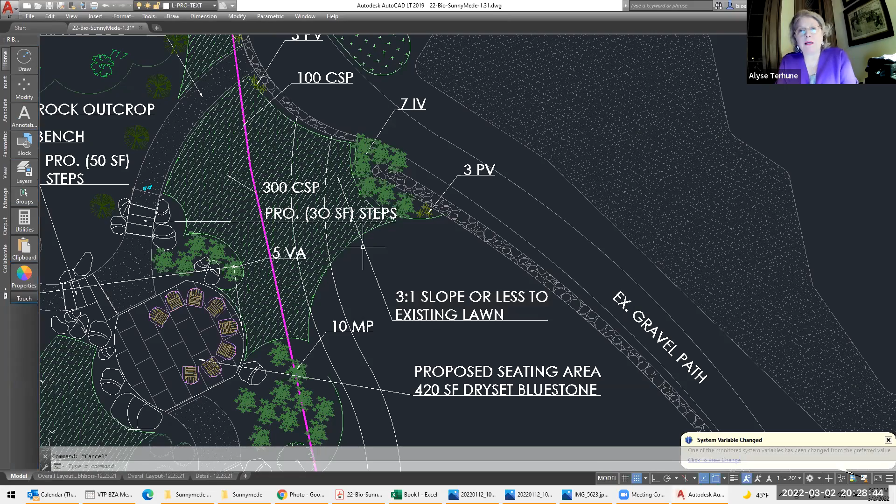Whether they need permits or not, I'm not positive, but if they do, in my experience, the DEC doesn't typically give a permit unless there's an approved plan. Right. Did that make sense? So they would need, number one, first the BAR would need approval from the BZA. And then yes, they would take the approval from the BAR if necessary, if a permit is required.

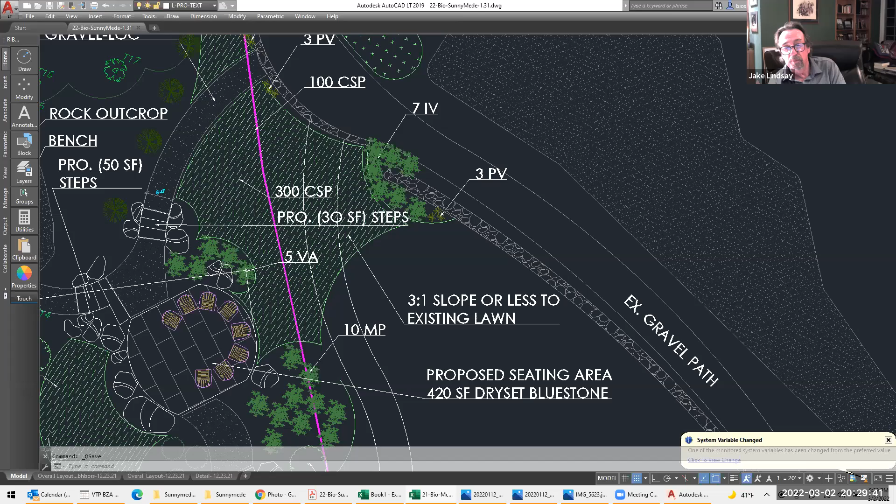Yeah, and I would think that the BAR would find that out. Okay, I'm not sure from reading, because I read the regulations that were sent over by the DEC, and it's somewhat ambiguous. A lot of it has to do with the slope, and that is one of the reasons I would look at the topo, because I think the slope is critical to the DEC as far as approval.

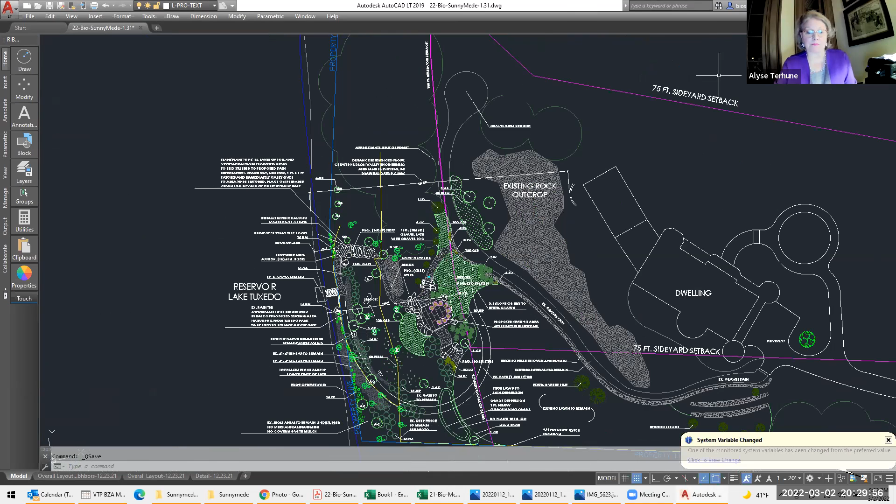Well, certainly the zoning board, at a minimum, could condition on compliance with all state environmental laws. I mean, that's kind of a given, but you could put that in your approval. Okay, any required permits, et cetera.

Well, while he's doing that, do we want to go through the points? Okay, Alyse, why don't you take us through the points?

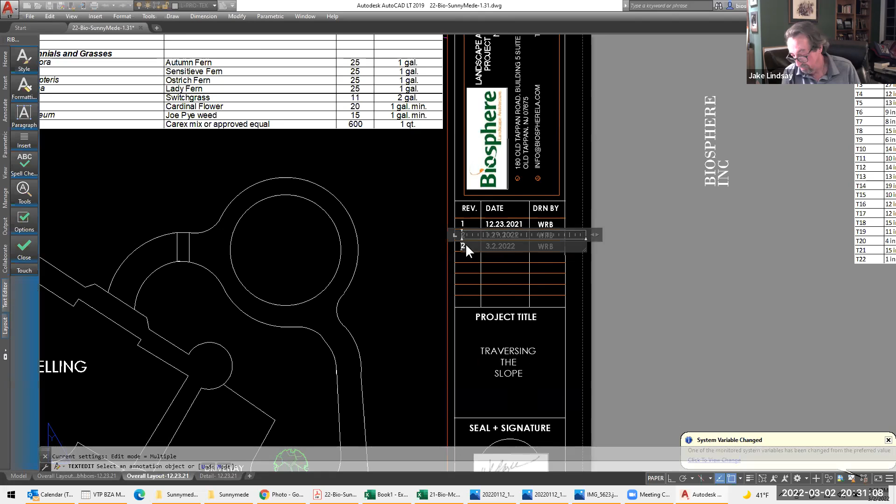The first point is whether granting the variance or variances will produce an undesirable change in the character of the neighborhood. I certainly would say it would not, and from a landscape sense, it's certainly a great improvement. Anyone else agree or comment? Yeah, I agree. That box is checked.

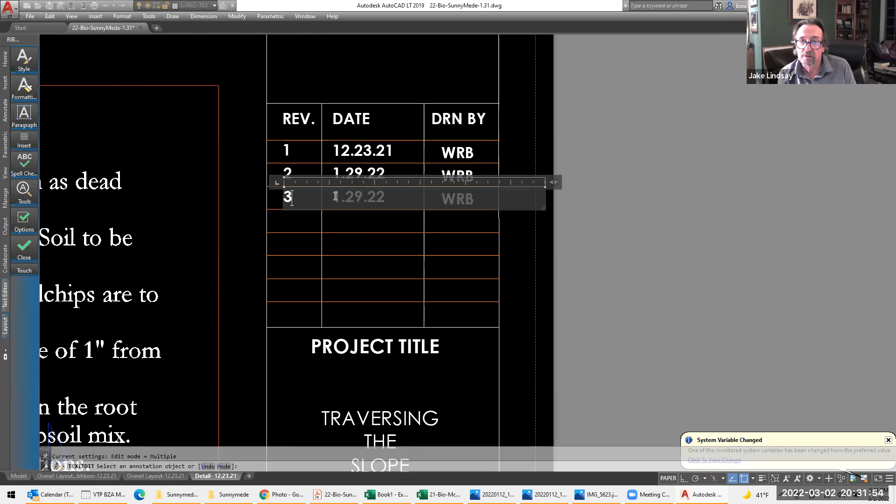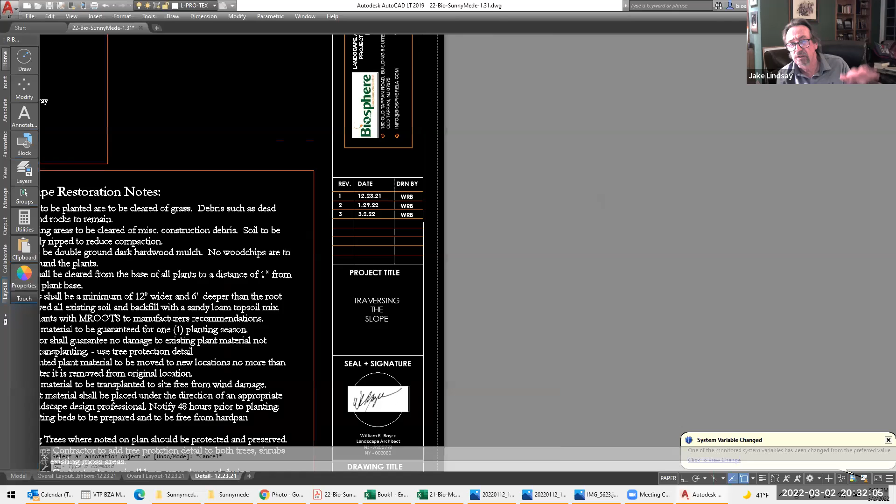Whether the benefits sought by the applicant could be achieved in some other way. They're improving an existing condition, so I don't think it really applies, except for the fact they are adding new things, and yes, that could be done another way, but the steps would really be required. Are there currently, right now, they got around the steps because they swung that path all the way around and did it on a gradual basis to eliminate the requirement for steps? Exactly, but we found that's more erosive because it's kind of steep. So by adding the steps, we're reducing erosion and making it safer because it's not like a cindery, marbly surface. Yeah, having been there today, it's not especially safe right now.

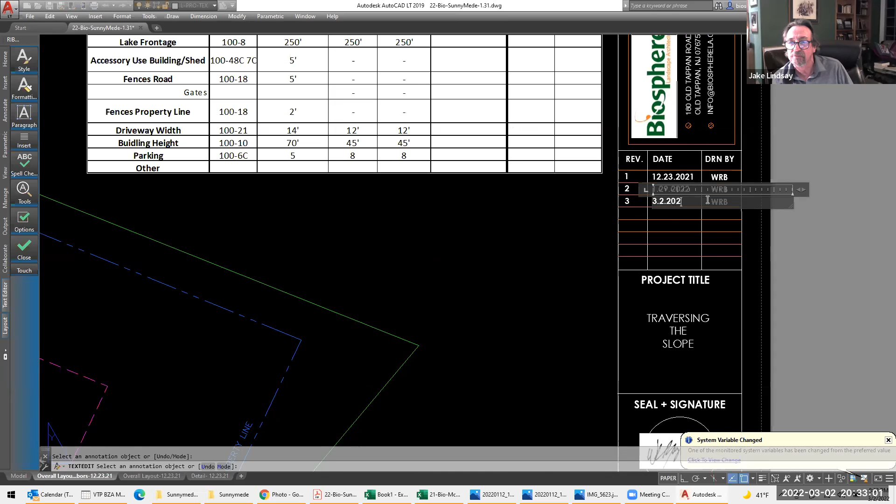Well, I was told, so I wanted to go there today, and Sonia told me don't, because it's all iced over. It is iced over, but that's why I went across the lake and took a picture with my cell phone and blew it up, and it worked just as well. That helped, yeah.

The answer to the question is they want the patio there to facilitate everything they want to do. I do not believe there's any other way for them to do it. So the answer to that point is no.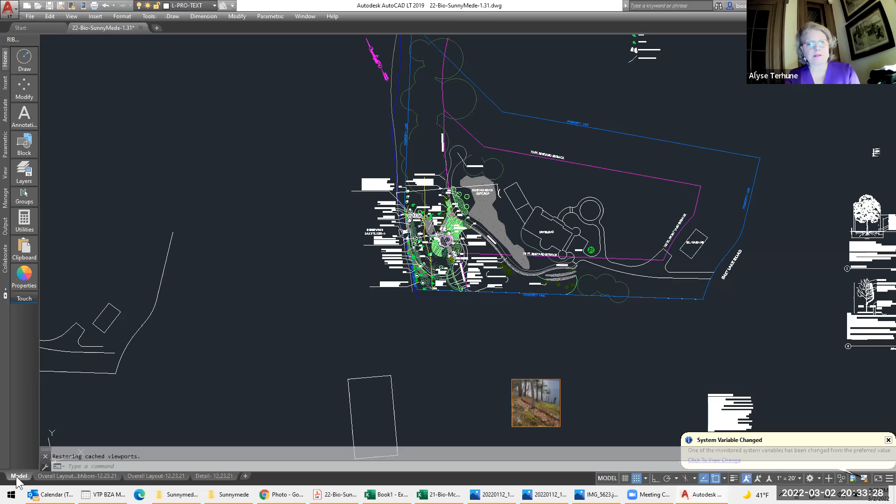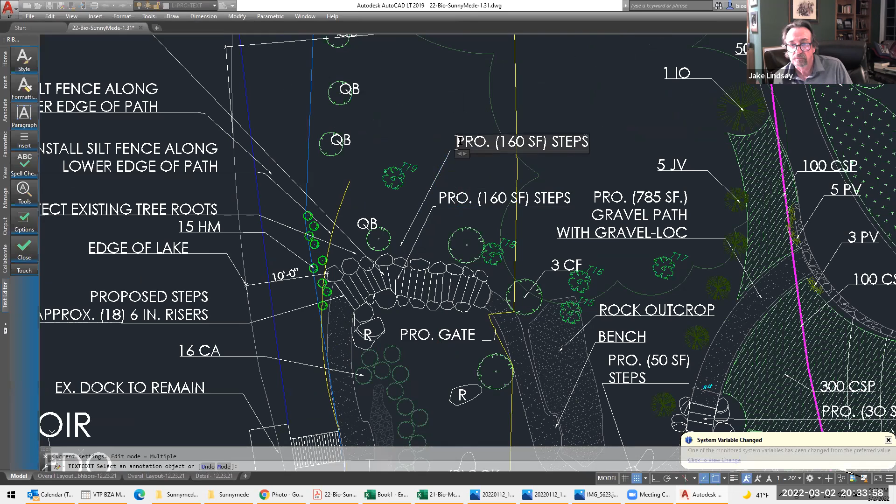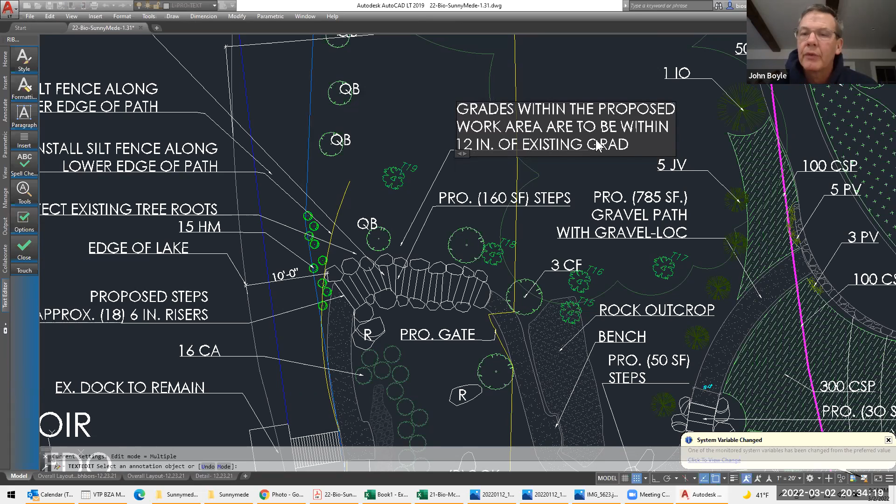Whether the requested variance is substantial. Again, it may be substantial, but that alone would not preclude granting the variance. So how does the board feel about that? Do they feel it's substantial? I would feel that it's substantial, but... I don't believe the steps are substantial, but I think the patio may be slightly different. Again, to the point, it does not disqualify this from approval. When you talk about doing something within the 100 feet, that is substantial. But that does not preclude approval, as Alyse said. I guess I view it as they're not constructing a building, right? That would be different. So it's less intrusive? Correct, yeah.

Whether the proposed variance will have an adverse effect or impact on the physical or environmental conditions of the neighborhood or district. In this particular case, it would be an improvement. Yeah, I would say no. Yes, an improvement, so I think that's a no.

And then the final factor is whether the alleged difficulty was self-created. Actually, I don't think it is, because it was a poor condition created by somebody else, and they're trying to fix it. I would argue it's created by somebody else and they're actually fixing it. Okay, those are the five factors. Would that be the right response to number five, Alyse? Yes, it's an existing condition that they're trying to remedy to the greatest extent they can, so they did not create it. Although, I guess you could argue they could leave it alone, right? All variances are to one degree or another self-created. You could always just do nothing.

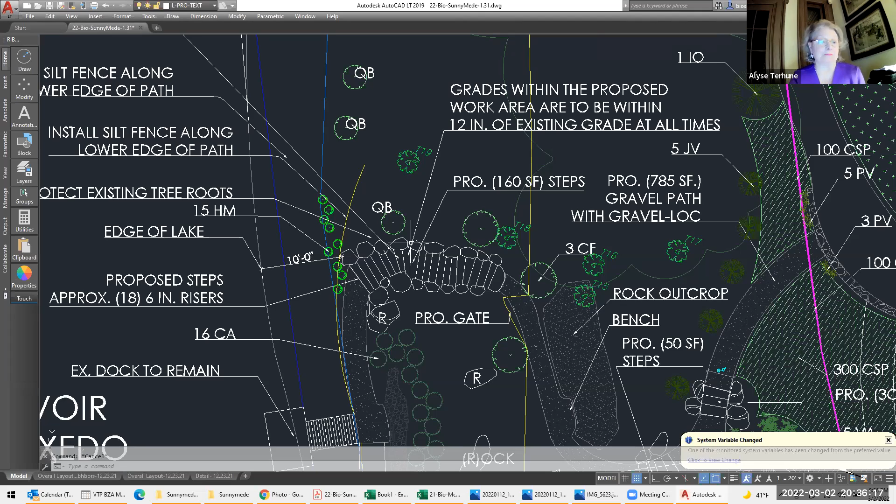All right, William, how are you doing on your AutoCAD? I'm all done, I could send it to print now if you'd like. Why don't you run through it with us, the changes you made?

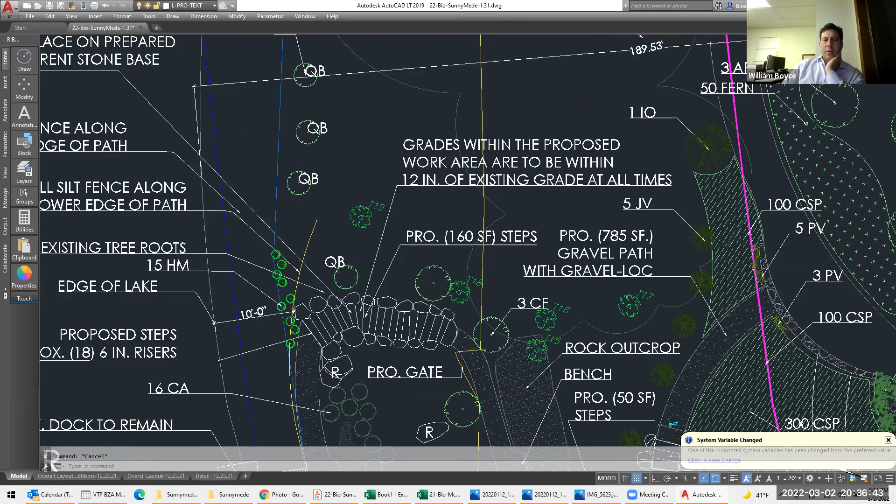I added a note to try to make the grading concept easier to swallow. The note says grades within the proposed work area is to be within 12 inches of existing grades at all times. That shows my steps and walkway really flow with the landscape.

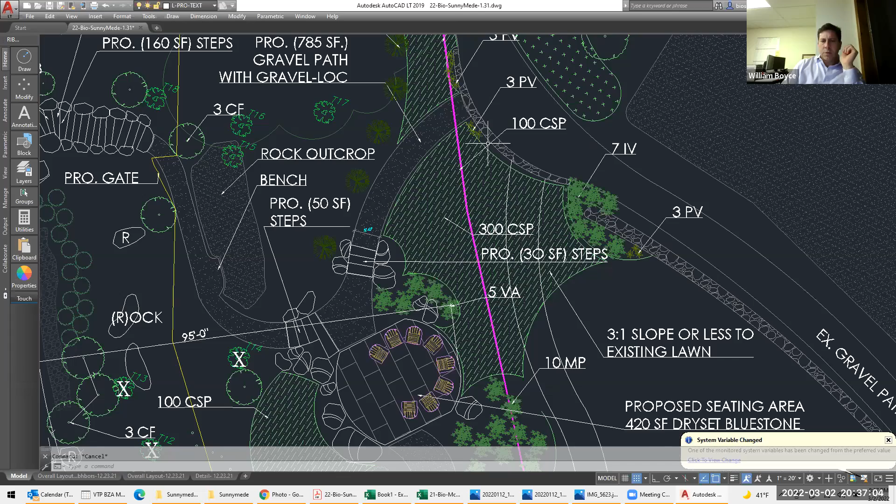I will show you the planting layout. So I brought the plants along the entirety of this edge of the gravel, and added 300 CSPs. I also updated the plant schedule to reflect those, in what's called paper space, which is where I print from.

So the CSPs are Carex speciosa, but then I wrote approved equal. Now I can take the approved equal out, but I don't want to create a monoculture of Carex, and I'm sure Christopher Gow and all the environmentalists, that's fine. We'll leave that up to the BAR as far as arguing about the plants. We just want the area covered. And then I covered that, I added the note about the grading.

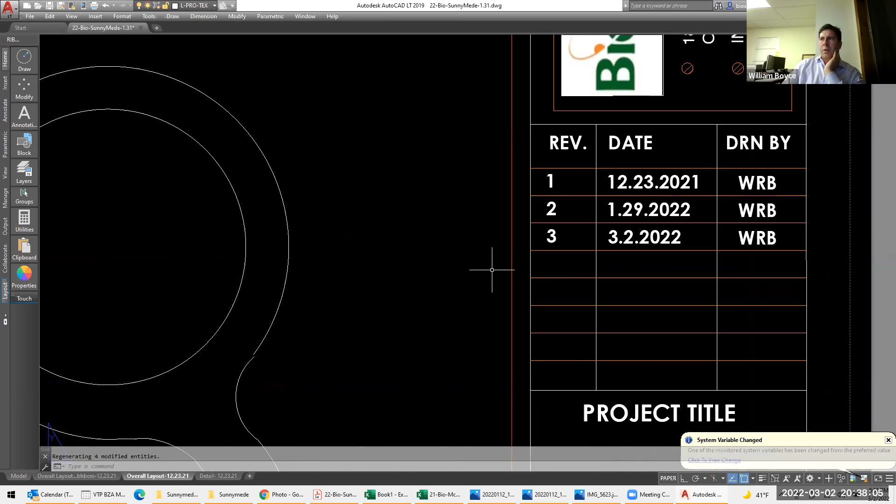I don't think I did anything else except update the date on the drawing to 3/2/22 as the revised date, if that helps for procedural purposes. I can create three PDFs of this and send it to Mr. Ledwith at any time you'd like.

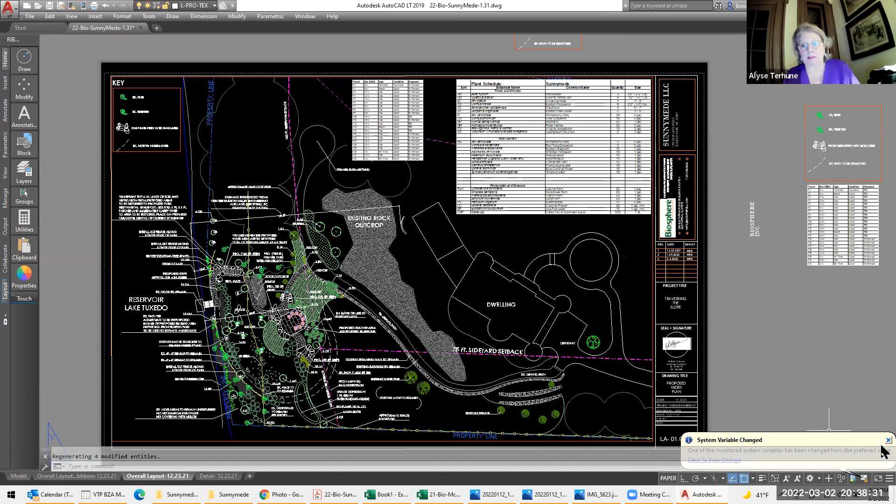Alyse, that'd be sufficient then before we go? Yes. Any action you take tonight will be based on this plan that the board is being shown now, to be emailed to John immediately, as soon as possible. I've never done this before. This either - I don't think we have either.

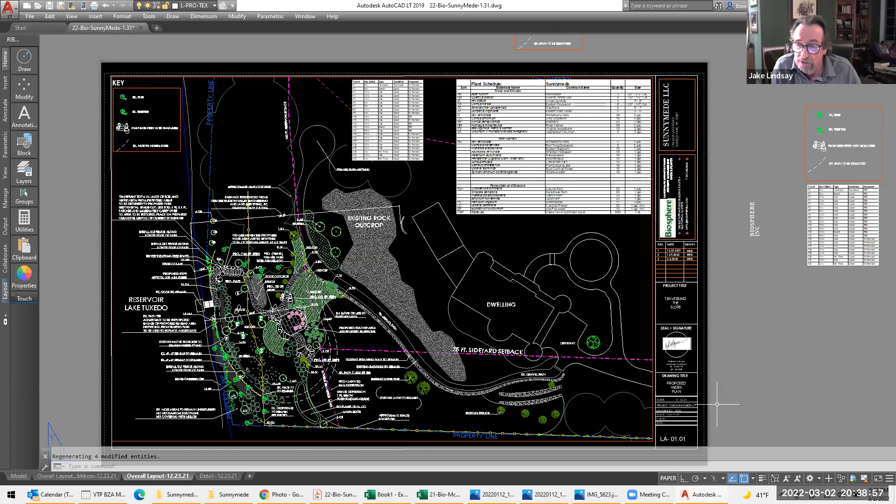All right, thank you for being so accommodating. I mean, not that we are approved, but in process, this is one for the records. And we're good, at least we're good with this. Then we're good, right? Yes. As long as you can see exactly what you're approving, then it's okay. Otherwise you're just giving an opinion, you can't really do that - you can't do an advisory vote, is what I'm saying.

Well, the other question I had, Melanie, are you good with this? Yeah, I don't know, what was it - CSPs or PVs are? I just hope they're not incredibly expensive and they're very beautiful. No.

The changes are, put it this way, it would save you money by not coming back next month, okay? Thank you, Jake, appreciate it.

I'm assuming at least that we would be ready to vote on this print that we have in front of us, dated 3/2/22. Just, you would close the public hearing and then you would call for a vote. I'd like to make a motion to close the public hearing.

Second. Aye. All in favor? Aye. Aye.

I would like to make a motion to vote approval on the drawing that has been revised at 3/2/22, that has been presented to us. Board vote, you need a second? Second, pardon me. Who seconded it? I did - Dave, is that Dave? Okay, I don't see everyone on my screen, so okay. He's wearing the blue sweatshirt.

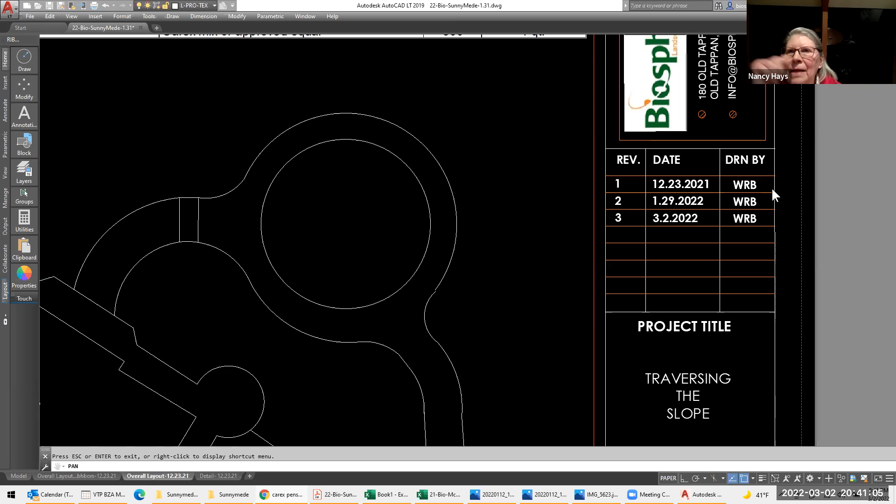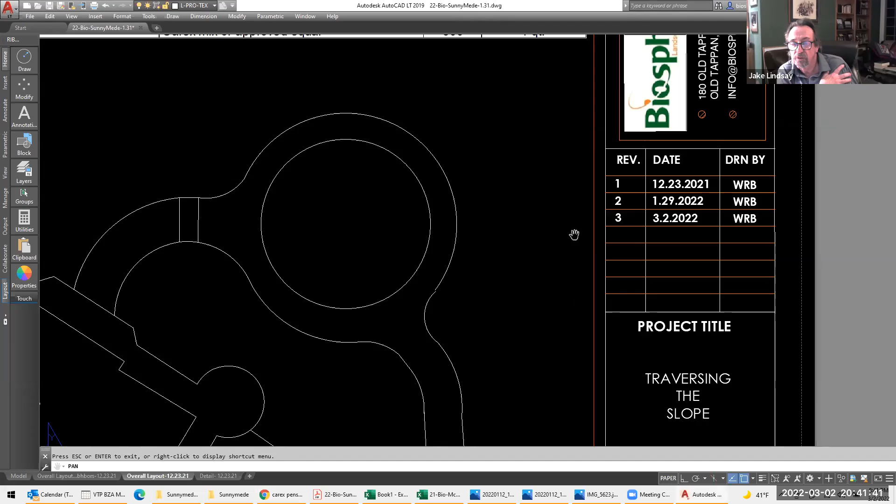Jake, go ahead. Jake, yes, are we voting on both the steps and the patio? Can't we separate them? We could separate them if you'd like to vote separately. That's kind of a bad idea, in my opinion. Honestly, I mean, you're looking at - we talked about looking at the plan as a whole, agreed. We're voting on the plan as shown 3/2, which includes both the steps and the patio and the plantings and the rocks removal and the stone removal of the existing path, the drawing and cut.

Go around. John, yes. Dave, yes. Campbell, yes. Nancy, no. Jake, yes.

Congratulations, thank you very much. We'll make you proud, don't worry. Thank you, we hope everyone loves it once it's done. Yes, can't wait, very much. And if anybody knows where we can buy some carex, that'd be great.

Thank you, guys, thank you. Okay, very much. And then William, you'll send copies of this drawing right away to John? I'm going to send John PDFs of it immediately before I leave the office. And if he finds something wrong or spelled wrong, I'm sure I could send another one tomorrow, if that's procedurally okay. That's okay, any minor correction is fine.

Yeah, I'll take a picture of it so I have it, so you can't change it. All right, I can send it to you too if you'd like. Yeah. Thank you, all right, thank you, okay, very much, take care, good.

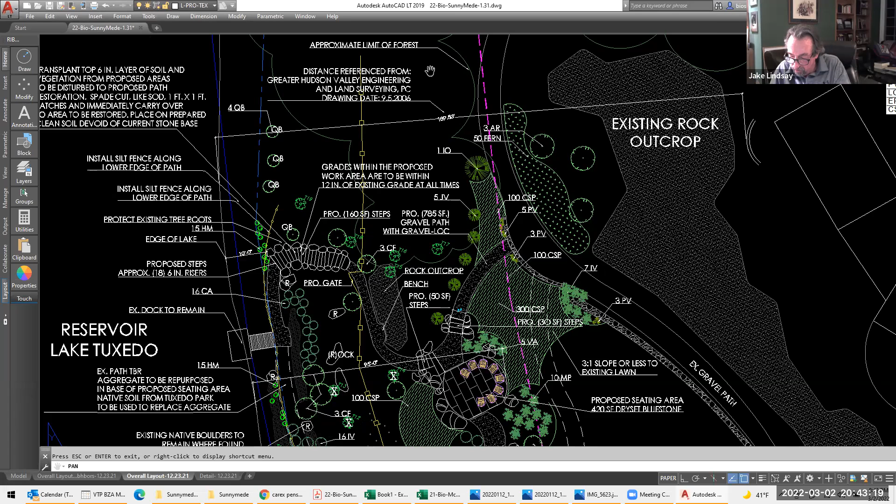Alyse, we have to approve minutes of our meeting of January 5th. Do I have to close - we already closed the public part of the meeting? Well, you only closed the public hearing, you haven't actually closed the meeting. So yes, you can take care of some business now.

I would like to make a motion to approve the minutes to the meeting of January 5th, '22. Has anyone had a chance to review them? Yes. Second, second. All in favor? Aye, aye, aye.

Do we need to do anything else, or did we approve it, or we just approved the minutes to the meeting to open the meeting to do it? I'm sorry, oh, did we approve the minutes to the meeting? Yes, you did. Okay, okay good, then that's it. Okay, bye.